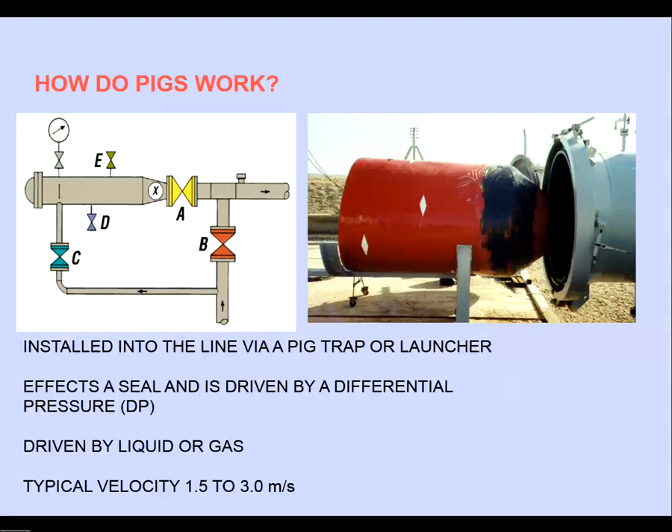So as I mentioned before, they're driven by the pigging medium, so whatever's in the pipeline, be it a gas or a liquid. Liquids are much more preferred. Obviously the pressures on a fluid pipeline tend to be a lot lower than gas, which is generally quite high pressure. So typically liquid lines, in particular oil lines in the North Sea, will operate maybe around about 30 to 40 bar. Gas pipelines could be 120 bar plus, so the pressures are considerably higher.

That creates some problems when pigging with gas, simply because the compressibility of the gas is such that the pigs will be subject to a series of velocity excursions. So when they come to a bend, they'll slow down, the gas pressure builds up, and they'll fire off quite quickly. It's very difficult to control pig speeds in a gaseous product. It's much more easier in a liquid.

A liquid is also a fluid environment, so there's lubrication in there, there's less wear and tear on the pigs, and the pigs generally perform better. Gas pipelines, although you do get wet gas and there will be condensates and moisture in there, tend to be a very dry, very aggressive, very harsh environment.

And the components on the pigs that provide the seals are a polyurethane material, so it's an elastomer material. It does have good wear and tear properties, but it will wear out over time, a little bit like your tyres, your rubbers on a car.

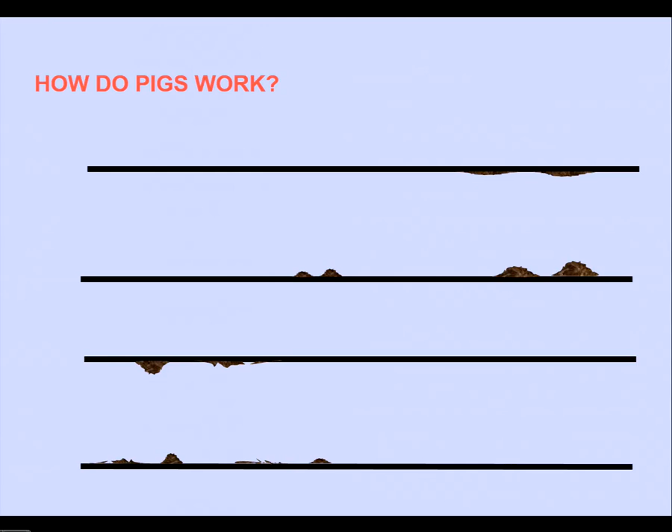A note to consider for later on from a cleaning point of view in particular is, if we allow the pipeline product to bypass through the pig body, this will create a forward flushing action. So we have the gas or the fluid coming in between the disc packages. It circulates around the brushes, which will help with cleaning the brushes and maintaining them and keeping them nice and clean.

But by allowing the product to flow in front of the pig, there's one of two things. It will create a turbulent flow at the front of the pig, which will prevent solid debris and mass building up, but it will also allow us to control or reduce the speed of the pig a little bit, in particular in gas lines. So with the high pressure, high flow gas lines, bypass is normally used to reduce the rate of the pig speed in relation to the gas speed. So obviously with a hole through the pig body, the pig will run slower in the gas than the gas is running itself.

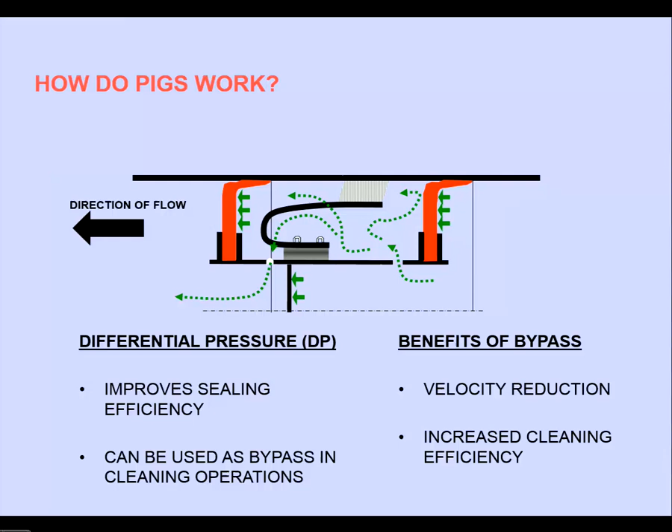A little example of the bypass. If bypass isn't used, the pig will go along the pipeline and debris will build up in front of it. If it's a waxy line, crude oil for example, that has the potential to build up and form quite a large slug, often referred to as a wax candle, and it will reach a point where the friction required to push that candle along the pipeline is greater than the differential pressure available on the pig, so it becomes stuck and you effectively block the pipeline. The same can happen with other solid materials, dust, debris, scale and powders in gas pipelines.

So if we use the product, the gas or the fluids, to assist with the cleaning, it helps to eliminate blocking the pipeline, and it helps to clean the pipeline, because that gas flow or fluid flow creates turbulence in front of the pig, which keeps the debris suspended and moving, mitigating the risk of blocking the pipeline. The worst thing that can happen when you put a pig in the pipeline is you block it.

Once the pipeline's blocked, it's effectively plugged and production stops. There are lots of different techniques that can be applied to remove that pig, but if you can't get it out, ultimately it's got to be located and you've got to cut the pipeline section out. So it can be a very expensive operation - a very expensive mistake to make, getting a pig stuck in a pipeline.

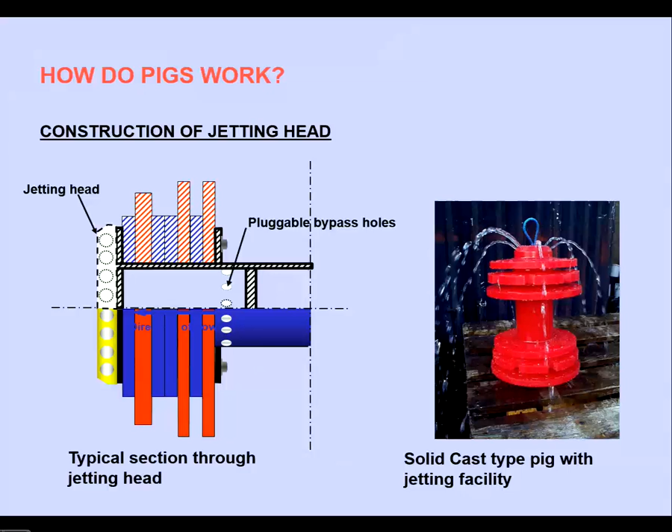So pigs fall into three main categories. I don't know if you've already covered intelligent pigging? I'm not quite sure why the introduction to pigging is always done after intelligent pigging, because it makes sense to introduce pigging and the practice of pigging before you talk about the inspection tool, since pipeline cleaning and preparation always comes before the inspection operation. I don't know why they insist on putting me behind it. But anyway, intelligent pigs - fine, we've talked about that. We're going to focus really on utility pigs and specialised pigs.

So utility pigs are often called production pigs or fit-for-purpose pigs. These are already available off the shelf - there are a lot of different pig manufacturers in the UK and in Europe generally, with different designs and different features, but they all follow the same principles, and the standard pigs are all readily available and will suit most operational applications.

But when it comes to pipeline preparation for inspection or other activities, or if you've got a particularly bad issue with the pipeline, such as heavy wax build-up, then you need to use more specialised pigs, and you may also need to add some intelligence to those pigs. Sometimes they're called semi-intelligent pigs, and there is a bit of crossover with intelligent pigs, but ILI, intelligent pigs, always refers to a metal loss inspection type tool. When you talk about a semi-intelligent pig, we're talking about a standard pig or a special pig that's got some additional data technology bolted onto it. We'll talk about some of these technologies a little bit later on.

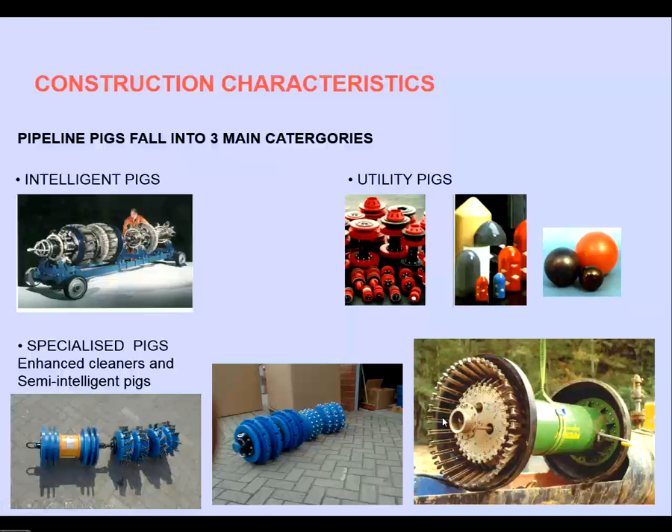So examples of specialised pigs: there are dewaxing tools, designed to remove wax specifically. This one's designed to remove harder scales. And this is a geometry tool - we'll talk about a geometry or caliper tool a little bit later on.

From a construction point of view, there are polyurethane pigs, but generally most pigs are metal bodied. They're single bolt or fabricated. Single bolt is, as the name suggests, smaller diameters - it's just a single bolt assembly with discs on either end and a fixing or fastening at either end. Most operators tend not to use single bolt pigs these days, simply because they don't have the same strength as a body tube - it's a solid bar, so it doesn't have the same strength.

Tubes are preferred - what we call the multi-bolt design. So you have a body tube with flanges, the polyurethane seals slide over the body ends, and they're fixed on with a series of nuts and bolts. Another common terminology is unidirectional or bidirectional. Unidirectional, as the name suggests, means it will only travel in one direction, and bidirectional means it can travel in both.

The difference between the two is the type of sealing element that's used on the pig. With a unidirectional we have a cup, with a bidirectional we have a disc. With a cup, because it's an umbrella profile, it can only be driven in one direction - it will only seal in the forward direction. If you pressurise it on this side, the pressure will just blow over the back of the cups.

A disc is a solid sheet of polyurethane that will seal pressure on both sides, so it will be driven in the normal direction. The great thing about a bi-di pig is if it does become stuck for any reason and you need to reverse pig it, you can, by depressurising downstream and pressurising upstream, push it back the way it came. You can't do that with a unidirectional pig.

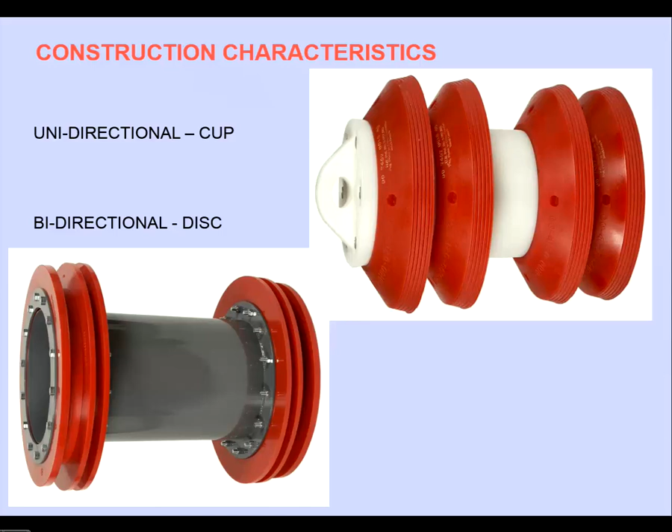From an operations point of view, cup pigs or unidirectional pigs are really only used as part of a cleaning program where you want something low performance. More and more, most operators and service companies use the bidirectional disc pig because it can be reverse pigged if it becomes stuck, but also even in standard form it performs a lot better - it's a better cleaner because it's a disc action rather than a cup, and I'll demonstrate that. So they're preferred for most operations.

So the conical cup was the one that I showed you there - it's a long flexible section. It only seals pressure in one direction, but the big advantage with the conical cup is because it's a long profile and very flexible, it will negotiate reductions in the pipe bore of up to 25%, which is good from a cleaning point of view, especially if we've got concerns about a lot of debris in a pipeline, and we'll touch on that later on.

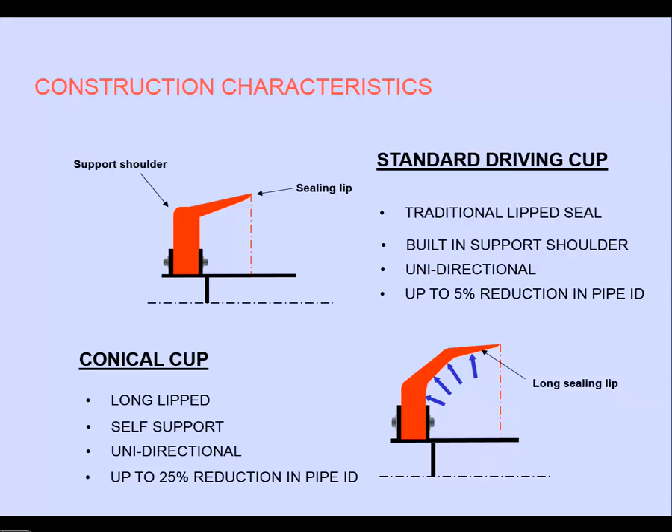The disc design by comparison is much preferred. We have a support disc or guide disc at the front, which is normally slightly undersized in relation to the nominal bore of the pipe, providing support at the front and rear. Then we have a couple of thinner but more oversized sealing discs which are designed to be oversized and a tight fit in the pipe.

A bi-di pig as standard will normally negotiate a reduction in bore of around 5 to 8% without any modification. But the big advantage is improved performance compared to any cup pig, and the fact that it can be reverse pigged - it's bi-directional.

There is a difference in cleaning performance between a cup and a disc. Obviously a cup, because it's a conical section, is very flexible, and when you get debris building up in the pipeline it will tend to ride over the top of it, so it can be deflected quite easily. Sometimes that's a good thing if it's part of a specialised cleaning program, because you don't want to bring out very much debris.

But as an operational pig, running it on a regular basis, it's not ideal because it will leave wax or powder in a pipeline. A disc, by comparison, because you've got this solid, thick diameter disc, effectively bulldozes and pushes debris out, so it's a lot more aggressive, as this sketch demonstrates - there's no lift off. It's very good at bulldozing and pushing, but the risk with a bi-di pig is if there's a lot of debris in a pipeline, potentially it's much easier to block it and get it stuck.

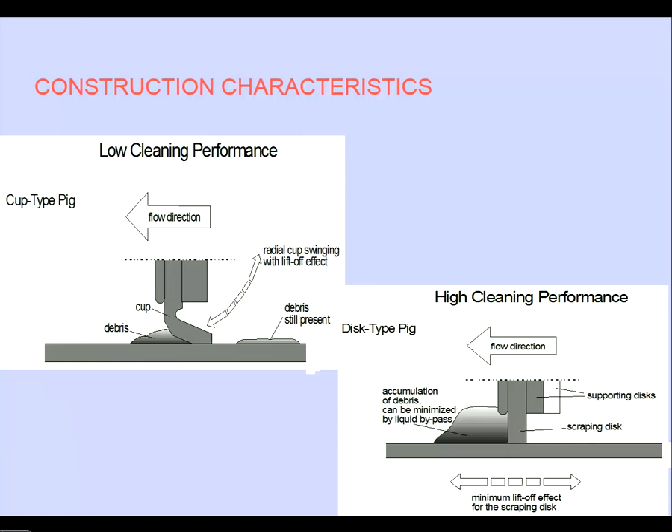With the metal bodied pigs, some of these slides demonstrate the different types of pigs available and their different construction characteristics off the shelf - single bodied or multi-bolt, unidirectional or bidirectional. I mentioned standard designs for specific applications: brush pigs, gauging pigs, batching pigs, dewatering pigs, a whole range, all of which we'll touch on. These are available from a multitude of manufacturers - I think in the UK there are 4 pig manufacturing companies, all competing for the same business.

They're all available in ranges from 1 inch upwards, 60 inch and bigger where necessary, and they all have very similar design characteristics. Most pigs available off the shelf nowadays are designed to go around a minimum bend radius of 1.5D. It's not such a problem in pipelines constructed in the last 15-20 years, because the minimum bend tends to be 3D, which is good from a pigging point of view.

A lot of older pipelines going back to the 60s used short radius bends, which can cause problems from a pigging point of view with negotiation, and they do cause problems for the inspection tools. But most off-the-shelf pigs will accommodate that.

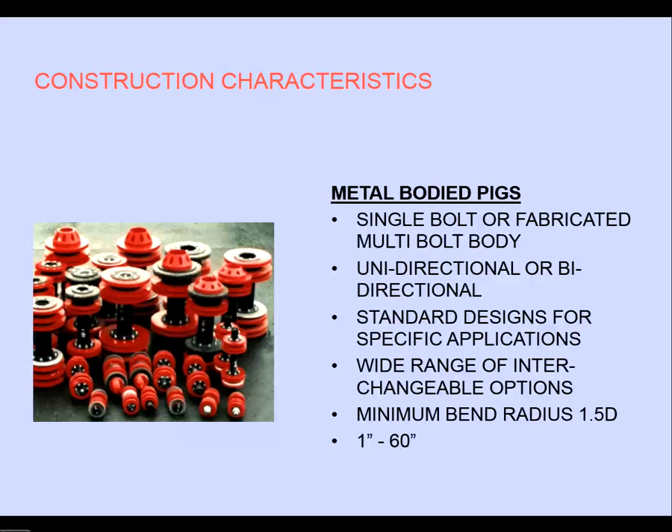A 16-inch batching pig will be £400 or £500, and the replacement discs will be maybe £250. So we're not talking about very expensive items. Some of the other pigs we look at are much more expensive by comparison, but these are quite cheap, fit for purpose. The urethane ones, of course, once they've worn down, are effectively scrap, they're no good. You can't refurbish them, they just go in the bin to be disposed of. And you can't put brushes on, or add other appendages to them either.

Foam pigs - these are the lowest performing pig of all. From an operational point of view, they're very rarely used, more used as part of a cleaning program for a specific application. The big advantage with a foam pig is it's very, very compressible. A disadvantage is it's very weak, so it can easily tear or break up, but that's also a good thing.

To improve performance, the bare polyurethane foam is often coated with a polyurethane skin, just to give it a bit more stiffness, a bit more rigidity. It still maintains the same degree of compressibility, and it just means it will last a little bit longer. But again, these are really only a one-run pig, so once it's been run once and it's worn down, it usually goes in the scrap bin.

From a cleaning point of view, you can have them manufactured with what's called wire card - a wire cast on a cloth and cast into the foam to make it a bit more aggressive, like a file card. Or you can get them grit coated, so they're abrasive when they go down a pipeline. Often used for pre-commissioning and commissioning phases, and often used as proving tools.

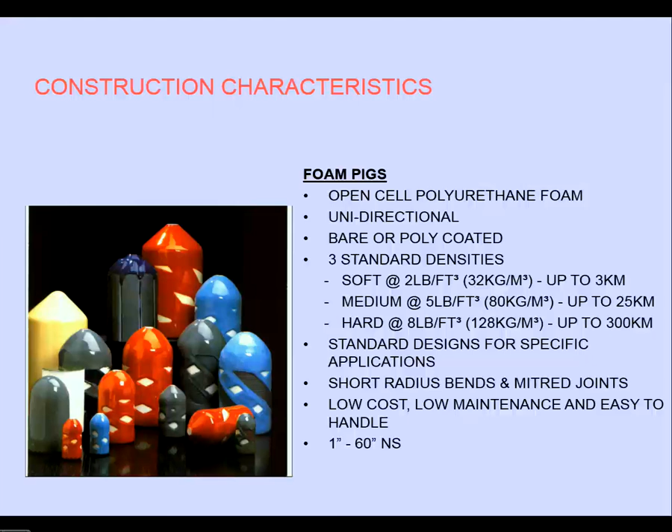A big consideration with foam pigs, particularly on receipt and along the pipeline, is that because the foam is very soft, it will quite easily divert up a branch. So if you've got a branch or an offtake along a pipeline length, unless it's barred, which we'll talk about later on, foam will very easily go up it. When you're receiving pigs, a metal body pig comes into the receiver, it's an oversized barrel, it will stall very quickly, but a foam pig will come in at usually a little bit higher speed, and there's a risk it can go up the bypass line. So with foam pigs you need to put in what we call a receiving cassette to catch it on receipt, which you don't normally need with metal-bodied pigs on receipt.

Pipeline spheres are rarely used. They used to be quite common in gas lines for condensate removal, liquid removal in gas lines. Mainly these days they're used for meter proving, so onshore just for calibrating gas meter proving systems. It's basically a hollow polyurethane ball which is filled with a fluid, normally a water and glycol mix, and it's inflated, so it's slightly pressurized, and it's a tight fit in the pipeline. An advantage with them, from a condensate removal point of view in gas lines, is that as they wear down, you can increase the diameter by inflating them again, a bit like a tyre, but they'll reach a point where they'll literally start to split. But again, not used very often these days—you probably won't see them.

So those are the main construction characteristics: metal-bodied, solid cast, foam, and the spheres.

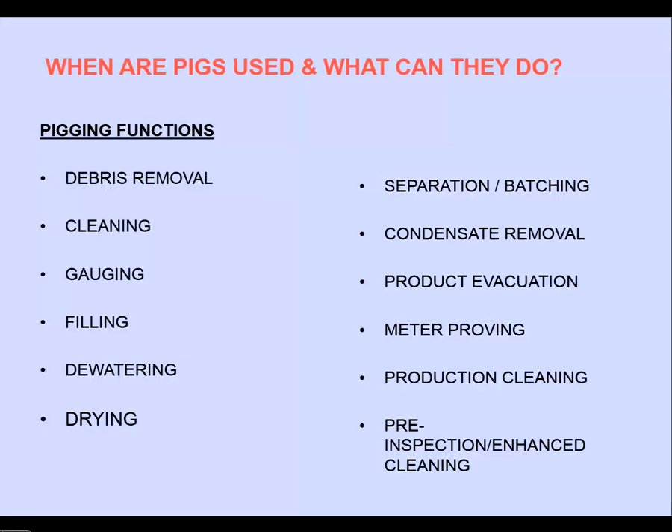Where are they normally used? They're really used right across the pipeline's normal life, from construction right through to decommissioning. Lots of different functions, and the functionality is managed by the pig design: the disc type, the cup type, putting brushes on there, putting other cleaning materials on, putting aluminium gauging plates on, which again we'll talk about. So the functions are very varied, and you can select the function for the task in hand, whether it's cleaning, filling, dewatering, drying, etc.

Okay, so when it comes to debris removal, quite often we'll use batching bi-di pigs.

Could you repeat again, spheres please? What's the role of spheres?

Spheres aren't used very often these days. They were commonly used for gas pipelines for condensate removal, but now most operators use bi-di pigs, to be honest. If you go back sort of 25, 30 years ago, spheres were common in what was called an automated system. You'd have a launcher which was inclined, and you'd maybe put 5 spheres in, with a control finger, so they could be launched automatically—they would just roll into the pipe, open the valve, roll down, and get caught up in the flow. But they don't do a very good job at anything else. They're only really used for condensate removal in gas lines.

Meter proving is where they're commonly used today. So if you've got an onshore gas receiving station with provers measuring the gas flow that comes in, they'll still use spheres because it's a known diameter. You've got a known pipeline volume over a distance and a known pipeline bore. It's just used to meter the gas as it's coming in and calibrate the gas flow meters.

Debris removal and cleaning, lots of different types of pigs which we'll talk about. This is a bi-di pig, so you can see you've got the support disc at the front and at the back, and then you've got the two sealing elements here.

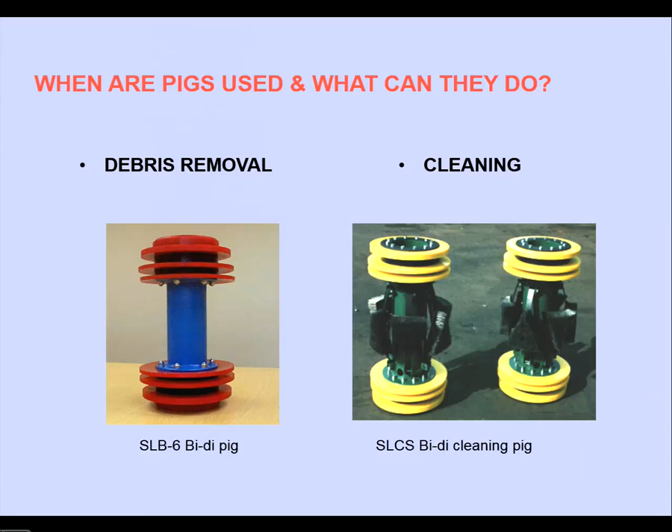Again, different types. This is an older design. It's a cup, a lip type cup arrangement, and you've got what's called a flat spring brush - a brush on a spring arm. These are a little bit dated. Some operators still use them, but because the brush is mounted on a single spring arm, it will tend to bounce and ride over debris.

A better option is a circular brush. Can I ask a question, please?

During the brushing, might it affect the internal surface of the pipeline? I mean, negative effect on the internal surface. No, there's none, because the metals that we're using are comparable.

They tend to be a small wire gauge, usually mild steel or stainless steel. This is a pretty poor pig design, because these bristles are a flat section, like 3 millimeters by 0.25 millimeter bar, folded a bit like a hair grip. So as soon as that goes in the pipeline, it's got no memory, it deflects, it deforms, and it'll stay deformed, so it'll tend to just rub or scrape along the pipeline rather than brush, unlike a bristle.

Brush pigs of this type will clean a pipeline back to bare metal, but they won't cause any damage at all. There is a consideration though, with flexible risers and the stainless steel carcass - if these brushes were particularly aggressive, because the inner carcass is like a corrugated assembly with ringed steps in it, they can potentially cause damage if they're too aggressive.

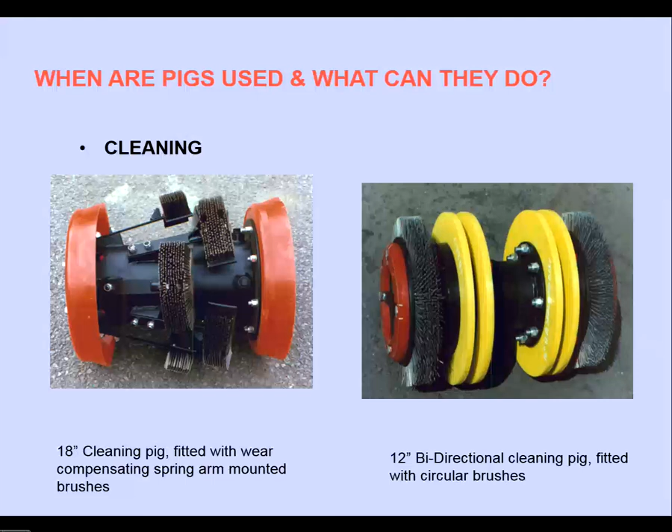The pig on the right is a much better cleaning tool by comparison, because the brushes are fixed - there's no bounce. But if the wires are round, you can select the wire gauge to make the brush either softer, like a house sweeping brush, or stiffer, like a yard brush. So you can control the aggressiveness of the brushes with round wire quite easily on the circular brush types.

Magnetic cleaning. The brushes are great for cleaning debris, sweeping it out and brushing it off the pipe wall. If you've got ferrous debris in there, we often use magnetic cleaning pigs to pick up that metallic debris, and that can be bristles.

These are like bristles that have come off cleaning pigs or inspection tools. You've got some construction debris in there, bolts. That's a great picture, but I'm pretty sure somebody's just thrown that on there to make it look good. In reality, a piece of metal that size with that type of pig would get pushed out in front of it - it wouldn't normally ride over it.

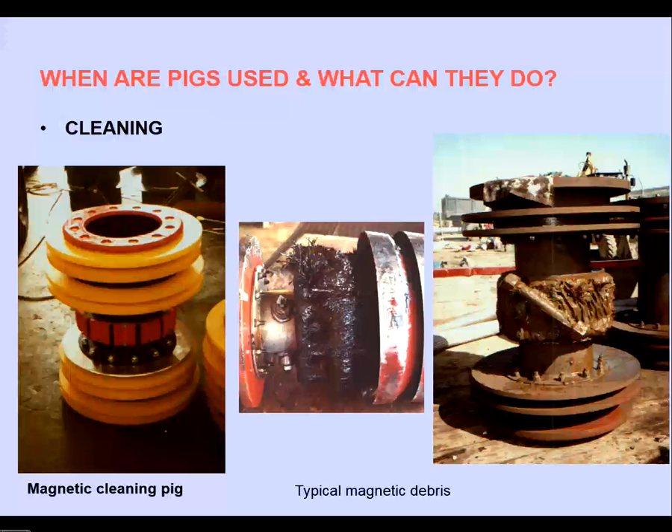At the time of launching these magnetic pigs, are there any precautions at the launchers? No. Did you talk about MFL inspection tools? Our MFL inspection tools have got big, high power, real high strength magnets. These, by comparison, are much lower grade - typically just a hard ferrite magnet or sintered neodymium iron boron. Nothing exotic, relatively small, relatively low strength.

Some pig manufacturers will advise there's a warning on magnets. So if you've got a pacemaker fitted, for example, you'd need to be careful. But they're not very, very high strength, not like the inspection tools.

On some of the higher performance magnetic cleaning pigs, they'll sometimes put a metal plate just to limit the magnetic field strength, which has to be removed before you put it in the pipeline. But apart from the weight of the thing, and being aware it could have an impact on anybody fitted with a pacemaker, that's the only real concern.

Your procedures as an operator should cover that. The pig manufacturer should also advise accordingly, but it should be caught and captured in procedures. It could also affect your watches and credit cards, I suppose, if you're too close to them. But honestly, the strength of the magnets on standard pigs isn't really high enough to cause any real risk.

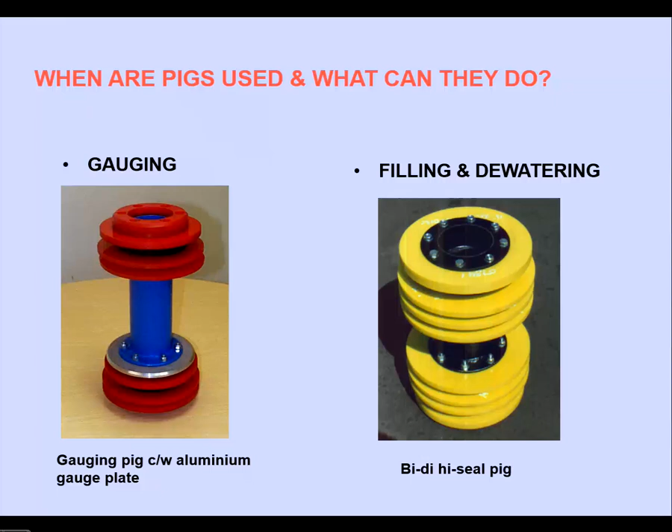Drying. Foam pigs can be used for drying purposes. After a pipeline is constructed, it'll be hydro tested, so it's filled with water normally and hydro tested. That water then has got to be removed.

You'll use a number of the filling and dewatering pigs, pig on the right, to bulk remove the liquid. Then you need to get the residual water, residual moisture out there, because quite often an operator will want a line to be of a certain dryness or a certain dew point. So foam pigs will often be used just to simply swab, blown through with air quite often, sometimes nitrogen, but mainly with air prior to doing a vacuum dry or a hot air dry, just to mop up any residual water.

Separation and batching. So spheres we mentioned earlier on for meter proving. It's worth pointing out they can be used often in the food industry and in multi-product pipelines for separation and batching of dissimilar fluids that are used in the same pipeline. So if you go to a processing or a food factory, you might have a pipeline that's doing tomato sauce one week and HP brown sauce the next week. It's the same pipeline, you just put a pig in to provide a barrier between the two dissimilar products and also evacuate it out.

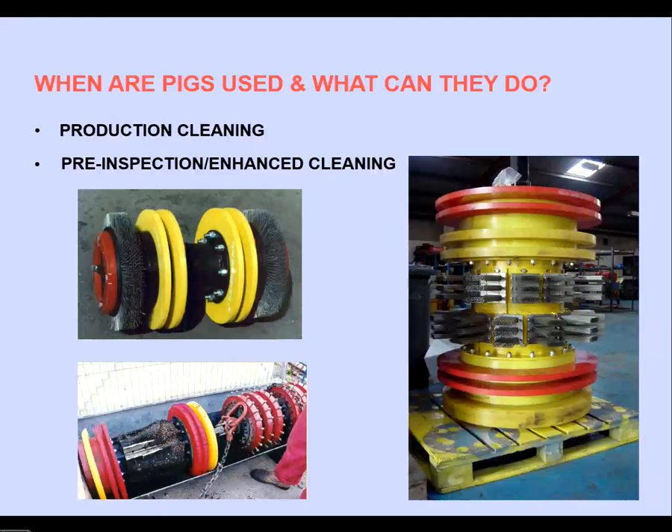Okay, so that's pigs, the constructions, various types and where they're used. Just carry on.

For separation and batching pigs, how would you receive the pig, and is there any issue with the product coming behind the pig? It'll depend on the particular process setup. They'll have various valve stations that divert flow down particular branch lines by valve control. When we talk about dissimilar fluids like that, it tends to be quite small bore pipelines, anywhere from 1 inch up to maybe 10 inch, so relatively small pipes. There'll just be valve manifolds which control and divert the flow before the pig's received.

Okay, so considerations for pigging. When you're selecting a pig to do a job, there's a certain job you want it to do, but we've kind of touched on a few of these points already. There's certain things you need to consider. Obviously, you need a launch and receive trap. If you haven't got those, you need to look at making modifications, because you need access to the pipeline, you need to be able to put the pig in and recover it, and you need to be able to do that safely.

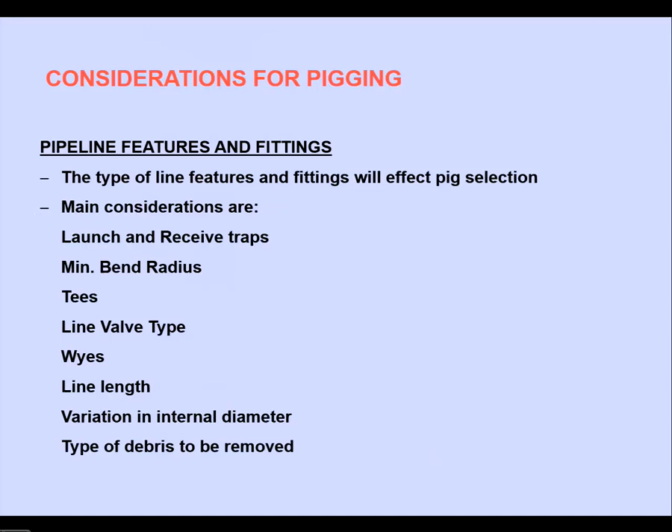The length of the line, so the material selection could vary, and the pig design could vary a lot between a pig that's going to be used in a pipeline that's 10 kilometres long compared to one that's 600 kilometres long. Variation in the internal diameter, and of course the type of debris that we're trying to remove.

So the bends - we talked about the difference in bends. Most pipelines today are 3D and above, so it's less of an issue, but historically, if you've got short radius bends, there is a risk if you don't select the right pig, or the pig's too long by design. When it comes to the bend, it will stop, it will stall, it will get stuck.

So how are you going to get it out? First of all, you've got to find it, and then it depends on how it's stuck. If it's not bi-directional, you can't reverse pig it. There's lots of different things that you try, so increasing the pipeline pressure to try and force it through, cyclic loading. If all else fails, you've got to locate it and cut the pipeline - shut it down, cut it, remove it, put a new fitting in.

We once actually - just on that note, I worked for PII quite a few years ago on the pre-inspection cleaning side of the business, and we were in, I think it was Nigeria, I can't remember, it might have been Nigeria, I can't remember.

But we were pigging the pipeline, foam pig had gone through it, no problem. We went through the development stages and we put a metal bodied pig in it and we were tracking it, and it got stuck. We found it, we located it because it had a tracking device on it, a transmitter which you can follow above ground. So we found it, we were looking at the pipeline P&IDs, and the operator said it's a bend, a 5D bend, it's not a problem, the pig can't be stuck here.

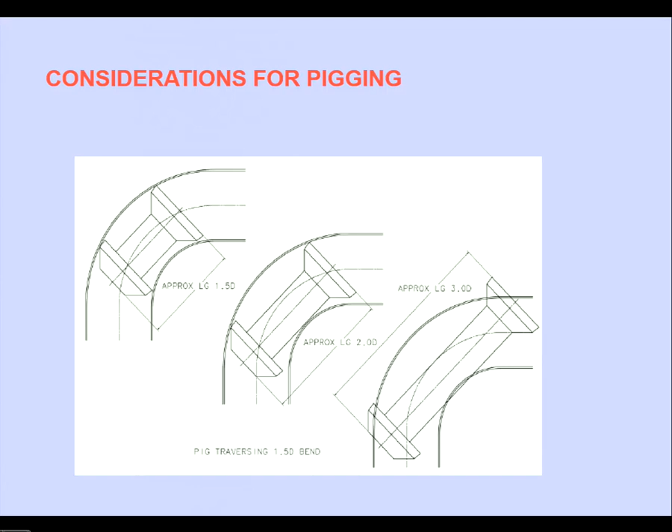And in that case, who needs to pay for the consequences? The pipeline operator, the owner, because the information that was provided was incorrect. So the pigs, the cleaning program and the inspection program was correct in line with the data that was presented, but because the bend wasn't a bend, it wasn't our fault. But usually the inspection contractor or the pigging contractor, it's always their fault as far as the operator is concerned, until they can prove anything different.

And with the inspection companies, there's often issues with inspection. So when you're doing a pipeline inspection, MFL or UT, it's got to be clean. It's got to be much more cleaner for ultrasonic inspection than MFL.

Quite often, inspection companies, when I worked for PII, used to do their own cleaning, which was fine - they were responsible for the cleaning. Then they moved away from doing their own cleaning to using subcontractors. So if you have a subcontractor for the cleaning and one for the inspection, if the inspection fails, the first thing the inspection company says is it's failed because the line is too dirty. And the cleaning contractor says, no, we cleaned it and there's no dirt coming out. So then you get into a battle between the two companies of who's responsible - the inspection's failed because the line's dirty, but he's saying it's clean, he's saying it's not.

So, who covers the cost there? But today there's technologies that can prove a line is clean before you do the inspection.

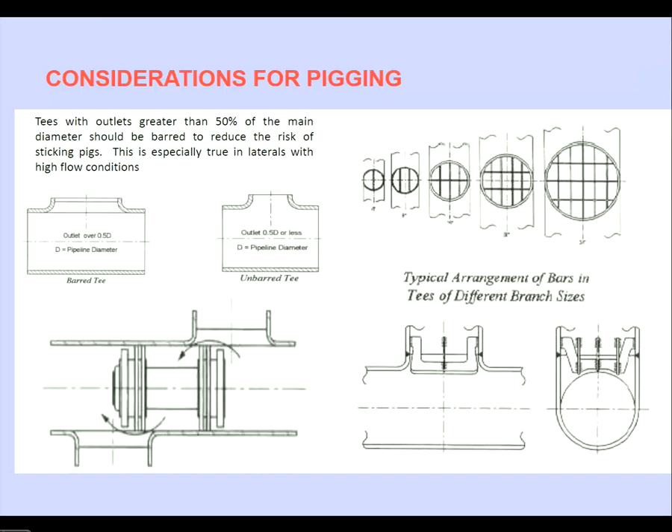So valves, there's a few valve types. You don't really see these on pipelines, to be honest. Most valves are full bore valves these days. Quite often you'll get reduced bore valves, but pig design is such that they'll easily negotiate reduced bores to your valves, as long as the transition is tapered and not stepped. That goes for any pipeline change in diameter. If you've got a change in diameter from pipeline or fitting from one to the other, it doesn't matter if it's 5 or 10%, as long as it's ground or machined into a concentric taper rather than being a stepped change in diameter. So just a few common sense points really on the valve side of things. But you won't see anything other than a ball valve in place these days.

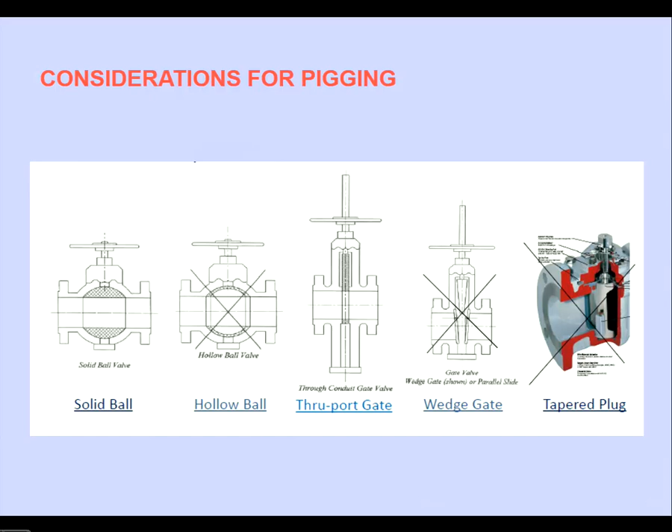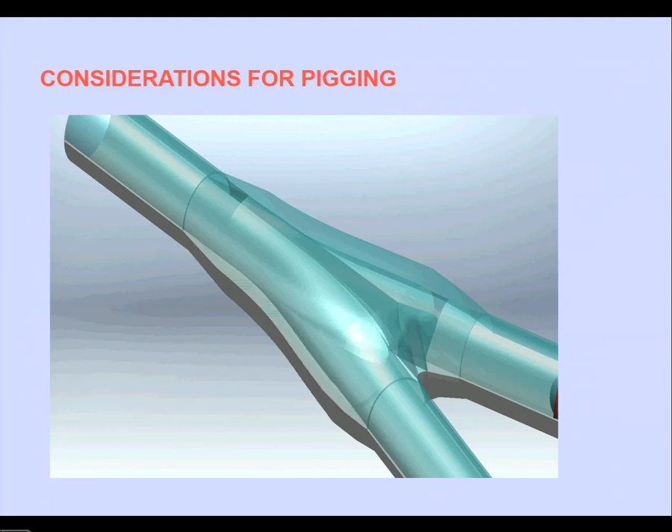So wye pieces I mentioned earlier on. These are wye pieces where you've got two pipelines coming together. There's a number of wyes in the North Sea. They can be pigged, but they can only be pigged in one direction, and because of the length of this open area here, you've got quite a large area which is open, so it's difficult to seal across the wye piece, so you need a much longer pig. If you make the pig longer, then the risk is it's going to get stuck in the bends. So to accommodate that, they're quite often articulated. It's made up of two modules, and then you've got an articulated joint. So it's got the sealing then, sealing the wye piece, but when it comes to a bend, it's articulated, so it'll just bend. Just got a knuckle joint in the middle.

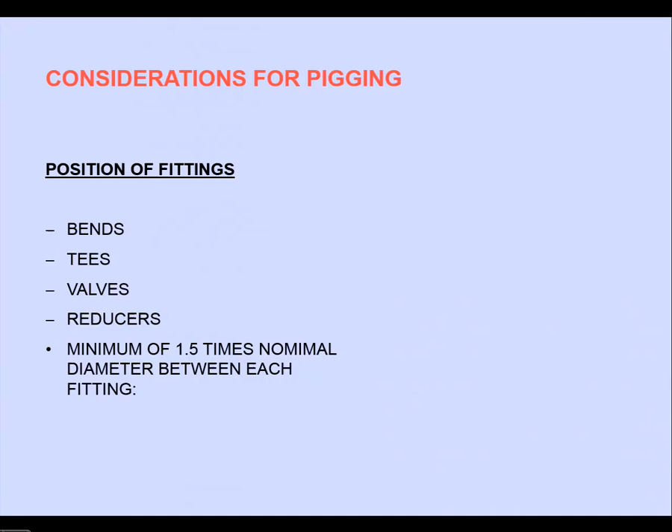The positions of fittings from that T drawing - back-to-back bends or bends that are very close together, even if the tool is designed to go through that particular bend, can sometimes cause problems. So normally the recommendation would be there's a minimum of 1.5 times nominal diameter between pipeline fittings. If you've got two bends simply welded back to back, then that can create a problem from a pigging point of view. Even with current modern up-to-date designs, it causes big problems. Some people might refer to S-bends, where you've got two bends back to back. There should always be a short section or a pup piece in between.

Multi-diameter pipeline - pigs will accommodate a change in diameter, generally sort of 5 to 8%, no problem, with very little modification. But you do obviously get multi-diameter pipelines now, so you might have a 12-inch line that ties into a 14-inch line or a 16-inch line, and it's a continuous pipeline, so you might have multiple diameters rather than multiple bore changes. Most pipelines can be managed - 16 by 24, 12 by 14, so there are some big step changes out there. The pigs that are used for the larger diameter changes are very specialised, obviously, and they need to be designed specifically for that particular job.

Excuse me, how much money would it cost to rent a pigging company?

To rent a pigging company, you just invite them. If one wants a pig, they normally charge a day rate - approximately between £500 and £900 per man per day, so around £1,500 per day plus the mob and demob costs, and then the rental.

Is it profitable to open a pigging company? Oh yeah, there's lots of pigging companies. Halliburton is probably one of the world's biggest. They do a lot of pipeline pigging, commissioning works, and they also do operation work.

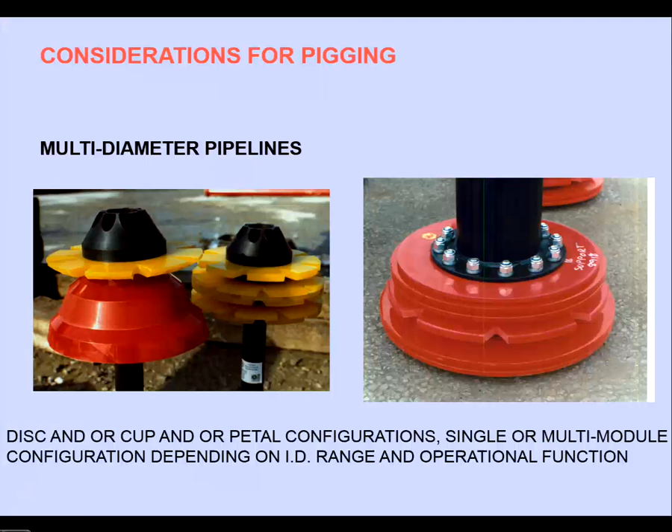The length of a pipeline is a consideration as well. Most standard pigs are good for up to sort of 150 kilometres, but as lines get longer, you need to think about high performance urethane - material that's going to wear longer and be a bit harder - and things like suspension wheels, the addition of wheels to reduce the bearing load and allow the pig to run further.

This particular pig here was designed for the Yacheng pipeline, which I think might have been a 36-inch pipeline, but it was almost 700 kilometres long. So that pig ran 700 kilometres in a gas line and came out in one piece, and that's the pig that they run on a regular basis.

The other consideration, of course, is the type of debris that you're trying to remove. If you're trying to get out ferrous debris, metallic weld rods, etc., you need a magnetic cleaner. A brush pig will sweep it out, but a magnetic cleaner will pick it up better. Brushes are good for dust, soft wax, any sort of loose debris, powder, particulate, loose scale.

For harder waxes, we need to use more aggressive brush type cleaning pigs with discs, or more aggressive specialised cleaning pigs. Hard wax, hard scale is difficult to get off the pipelines, and none of the pigs I've shown you are really any good for hard wax or hard scale problems. Descaling pigs are the type of pig which can damage a pipeline - you'll see how aggressive they are in some of the slides.

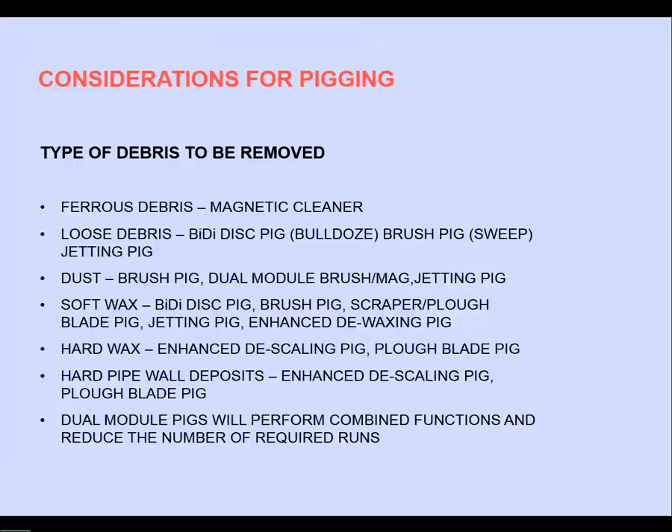Yeah. Okay. Crack on. So yeah, we'll cover that in a little bit more detail as we go along. But obviously, when you're selecting your pig, you need to be aware of what it is you want it to do. Do you want it to remove soft debris? Do you want it to remove wax, hard wax or soft wax, scale, loose scale, powder? Do you want it to just bring out water? So there's lots of things, and every pipeline's different, so it varies and it can vary from field to field.

So yeah, all pipelines are different. We need to consider them individually. We need to look at the pipeline features, so the bends, the valves, anything that might prevent or inhibit the running of a pig through the pipeline, the pigability as we call it. What it is we want the pigs to do. Standard pigs off the shelf, so the utility pigs might not be suitable. You might have to look at more specialised pigs, more aggressive pigs, more specialised materials.

Something that's not mentioned on there, high temperature is another consideration, of course, with the urethanes. So standard urethane is good for maybe 60 or 70 degrees, but if you've got a pipeline that operates at high temperature, you might need to consider alternative materials to polyurethane, like rubbers. And you also need to consider the volume and the type of debris you're going to remove. So again, before we start pigging a pipeline, if it's a pipeline that hasn't been pigged for a long time, there's a proving process, but it might well be worth doing a flow model on that before you start thinking about pigging.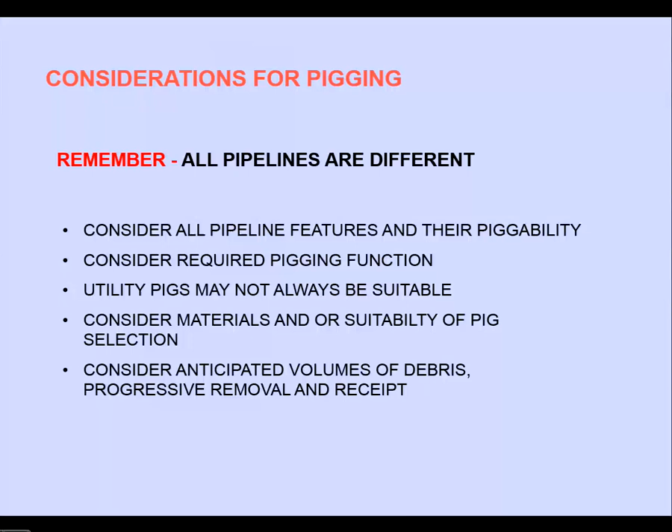So why clean a pipeline?

It's very much like our own system of veins and arteries. If you go large at McDonald's five nights a week, cholesterol's going to build up, fat's going to build up, those little arteries get smaller, and the old ticker finds it a lot harder. So over time it's going to pack in. It's the same with the pipeline.

You've got a pumping system ultimately, and a pipeline transferring that fluid or product. If the pipeline bore reduces, you need more effort to pump the same amount of fluids or gas down it. So ultimately it's a nice little analogy, but from an operator's point of view, it's a massive investment.

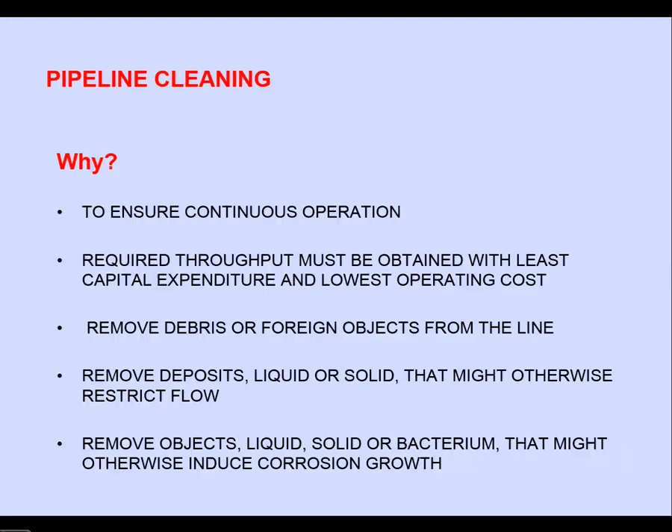So we want to keep it clean to ensure continuous operation. We want to maximise throughput, getting as much product through there, gas, oil, whatever it might be, at the lowest operating cost. We want to keep it clean because we don't want foreign objects in there, as that can cause corrosion growth. We want to get deposits and solids out that might restrict the flow, because that impacts production costs, and we also want to remove anything that might cause corrosion growth.

Here's some photographs of some pipelines. So that's scale build-up in a pipeline. You can see it has a big impact, and this is debris that's been removed as part of a cleaning program.

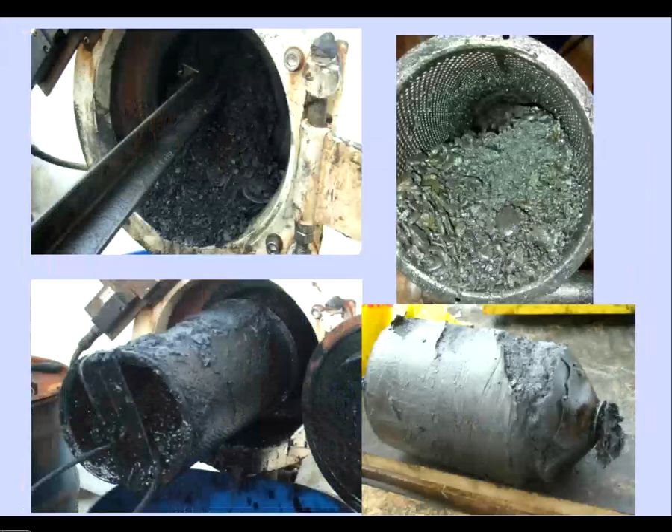So there's a pig pushing out soft wax, and it can be quite a nasty environment. This is scale being pushed out of a pipeline, so these are more hard pipe wall deposits.

That's a foam pig that's gone through a pipeline with a lot of scale in it, so you can see the foam pig's come out, but it's sustained quite a lot of damage. That tells you the pipeline's pretty rough inside, and that helps you decide how you're going to approach the cleaning and what type of pigs you might want to use.

So this type of debris is not uncommon, you come across it all the time, and some of these volumes can be difficult to manage. Environmentally, they can be difficult to handle. There's lots of considerations. And from an inspection point of view, you can see here, this is an inspection tool.

It's become so clogged up with wax that it's affected the sensors, so that inspection will have failed because of the amount of wax or the dirtiness of the pipeline.

As I said before, an inspection run might cost £100,000. If that's my inspection tool and it comes out like that, I'm going to say to you as the operator, sorry, we're not going to get any data because your line wasn't clean enough. It's cost you £100,000, I'll run it again, and that's another £100,000. So it's important to make sure it's clean.

And the same with this tool here, you can see this is a debris mapping type tool, so the wax is built up around the sensors. The wax build-up will impact on the quality of data that can be acquired, that's collected, and it could ultimately result in a failed inspection.

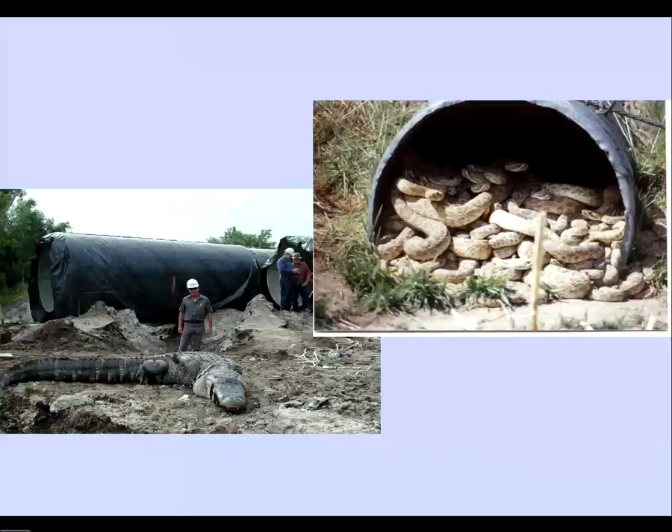So it needs to be managed. And then, yeah, this is construction obviously, but as part of construction, they've come back to the pipeline. It's full of snakes, and this one had an alligator, a big crocodile, down it.

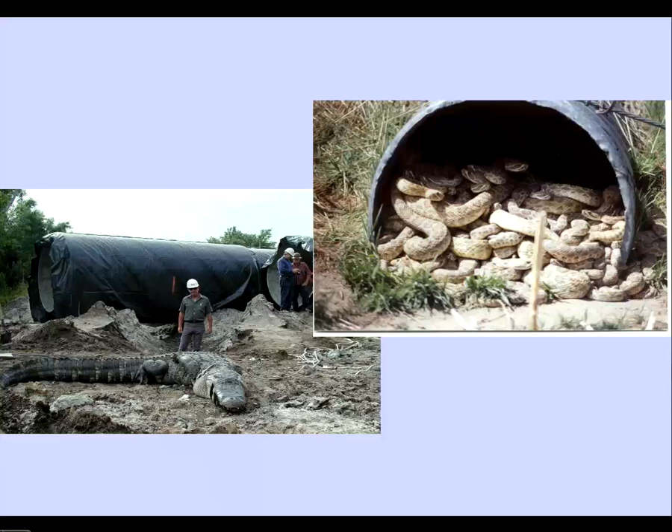The best story I heard from a commissioning point of view - the commissioning stage is when the pipeline's being constructed, it's all welded up, and it needs to be hydro tested before the product's brought on, before it's commissioned. So as part of the pre-commissioning phase, there was a pipeline in America, in the US, and apparently it brought out a donkey. This was T.D. Williamson. As part of the pre-commissioning, when they came to bring the first pig out, there was a dead donkey. The donkey had obviously gone into the pipeline whilst it was being constructed, walked down it during the night, and then the guys had come and welded it up.

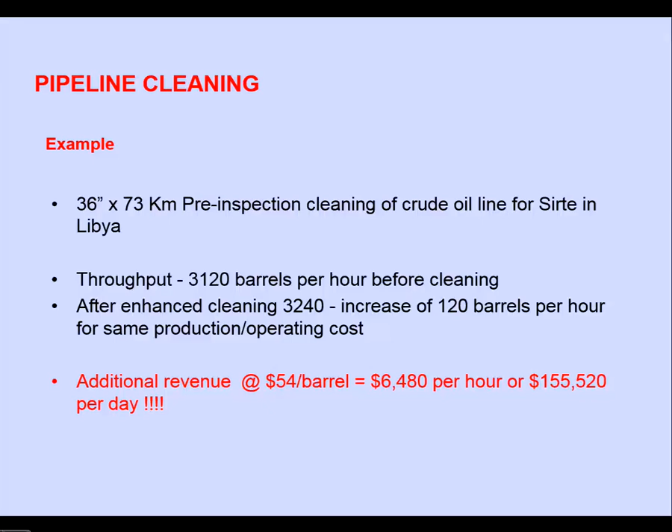So just an example of that - this is going back a few years, but it's a nice example. A 36-inch pipeline, it was in Libya for Sirte. The pipeline was to be inspected, but it had to be cleaned first. Normal throughput was 3,120 barrels. The pipeline was cleaned and inspected, and through doing nothing else, the throughput increased by 120 barrels per hour. Even at today's $50 odd a barrel, that's a lot of money for nothing. So a small investment from a cleaning point of view can make a big difference in the revenue generated from improved or increased throughput. And of course it means the operating costs are kept down too. So the benefits sort of speak for themselves really.

With regard to inspection and the cleaning and all the rest of it, we're looking at this. A pipeline needs to be cleaned from a corrosion point of view to ensure that inhibitors and biocides that are put in there hit the pipeline and clean and keep the pipeline in good condition, and get a good inspection. But from an operator's point of view, if I put my tracker hat on, ultimately we want to get as much product through that pipeline for the least operating cost, and by keeping the line clean, we can do that.

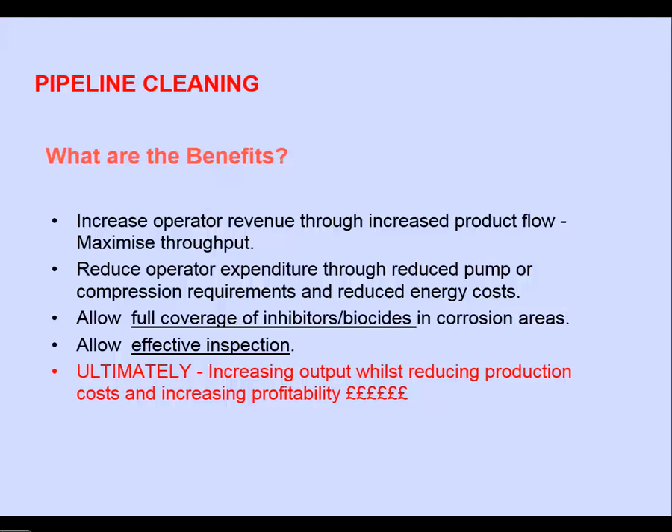We need to establish whether it is clean or not, whether there's a problem. We need to implement a cleaning program to get it to clean to the standard that we want it to get to, and we need to maintain that cleanliness, and we want to monitor it as well.

The more information we have on the background to its operation, the easier it is to determine how to clean it and what to do next. So if we don't have all of the pipeline details, the configuration, the P&IDs, then we need to start thinking about how we're going to prove the piggability and how we can acquire that sort of data.

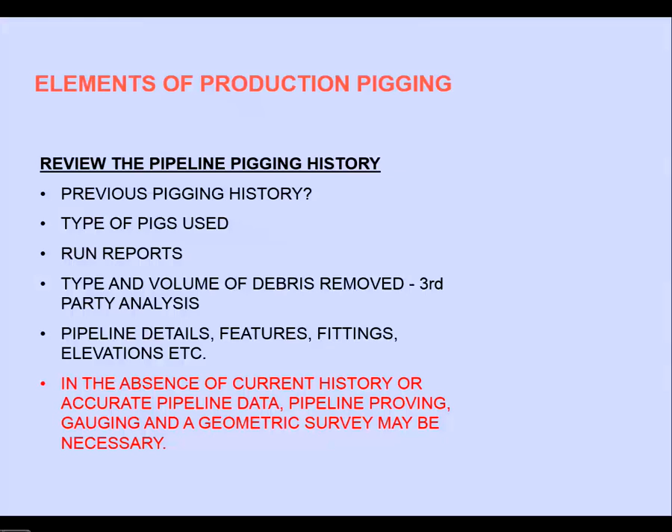There's a couple of common tools used to give us some of that confidence before we start selecting a cleaning program and looking at certain types of pigs. The base one is a geometry or caliper tool, sometimes referred to as a geometry survey. We'd first off need to prove the piggability of the pipeline.

So if we haven't got any of that background information, we'd go back to square one, we'd get a foam pig of a certain density, put it through the pipeline and see that it comes out. If it comes out in good condition, that's great. Then we'd probably put in a higher density foam pig. If it comes out in good condition, good. Then we'd use another high density foam pig and put an aluminium gauge plate on it.

So the gauge plate would be sized to suit the caliper tool. The gauge plate, if you remember, is used to confirm a minimum bore. So if we put a gauge plate of a certain size on a foam pig, and put it through a pipeline and it comes out in good condition, then we can be confident in putting a metal-bodied pig in if we know that it will negotiate the minimum bore that gauge plate has told us.

Caliper tools are very good at negotiating small bores, so depending on the manufacturer, they'll generally negotiate reductions in bore between 25 and 50%. So these tools, although they're a metal-bodied pig, can accommodate some big changes in pipeline diameter, and it's designed using, generally speaking, conical cups, because you don't want it to be effective at cleaning either, since at this stage we might not really know how much debris or what potential there is for wax or scale in that pipeline.

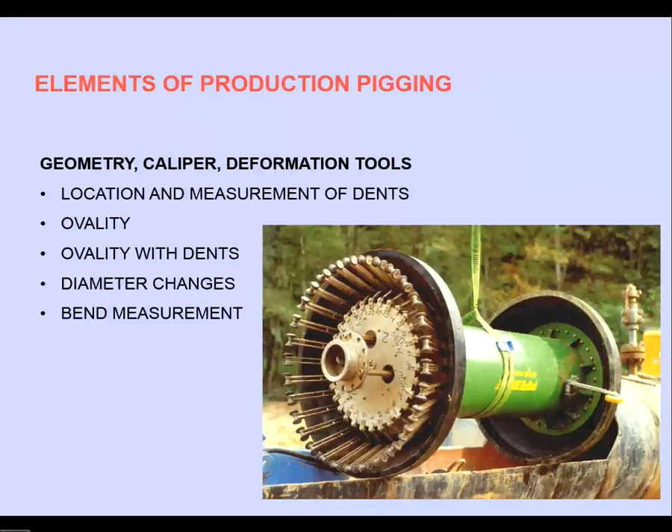So this is a fairly simplistic output from a fairly basic caliper type tool. It goes down the pipeline and gives us a pattern or a picture of what the pipeline condition is like. The middle one is actually the best, showing a fairly straight flat line with a series of peaks.

So these peaks that are uniform and a consistent distance can be identified as being the circumferential welds, the weld beads. So this caliper tool has seen all the weld beads, some minor anomalies. That tells us that generally the pipeline is in fairly good condition with regard to the diameter and the ovality.

When you've got dents, ovalities and various pipeline features, changes in diameter, where it goes through a valve manifold or valve station, there's characteristic signals which from a data analysis point of view can be read. Normally experts would obviously go through this information to confirm what there is. So that's typical of the sort of signals and characteristics you might see - change in diameter, dents.

This pipeline here on the bottom, this line is pretty erratic. You can see a couple of the welds, but it's all over the place. So that means there's a few things going on here. There's either a lot of severe anomalies and or pipeline debris, because the geometry tool measures variation in the bore. If you've got hard pipe wall deposits in there, hard waxes and scales, and even loose debris, it will read that as being a change in diameter.

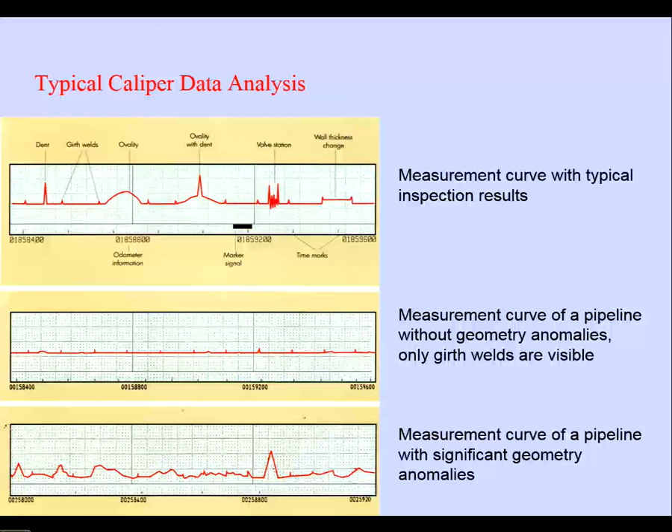This is a high resolution tool, so this is inspection data quality. We've got a pipe image, so it's almost photographic. And you can see from a cross-section point of view, it measures the extent of the dent, so you can see quite clearly there's a dent here. These are each caliper arm, it's moving the measurement on it. So the data that you get is really good, very accurate, high resolution, good coverage.

It depends what you want to pay for as well, because you pay more for a higher resolution than for a lower resolution. But it does give you a whole load of information. So that's a better example of the dent there.

So that's it from a FEA 3D modelling point of view, and then here you can see the extent of that dent. And then from here we can take the actual measurements, and that information you can take away and do 3D modelling, finite element analysis, and decide whether or not that dent is an integrity issue or not, and then you might decide that that dent needs to be cut out or whatever. But it's great technology.

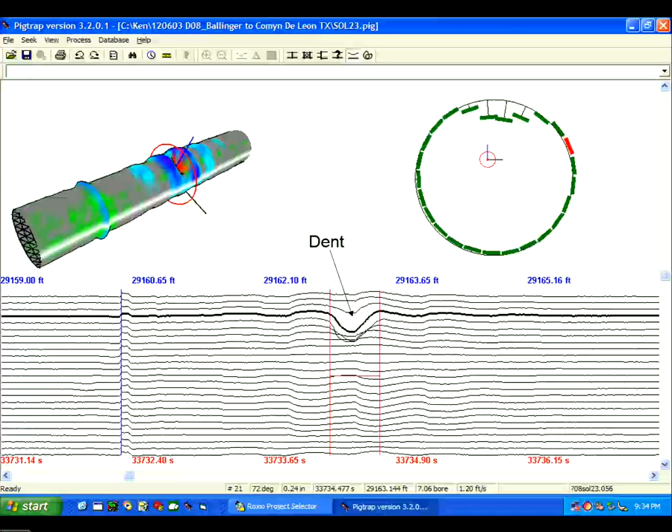So we need to establish the internal level of cleanliness. The geometry tool might give us an indication that the cleanliness is a problem, as that did. So we can look at the current pigging data, run reports to see what's been brought out, what we know about it, or we can do a deposition measurement. So there are a number of tools that are used to measure debris or map debris in the pipeline. Again, there's high level and there's low level.

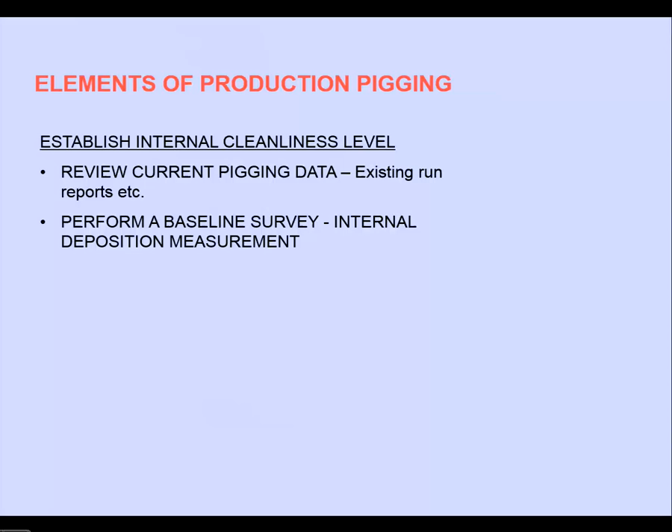So there's a very simple type of technology which is a data logger, and there's a more expensive high-end debris mapping tool. We'll talk about each type, but rather like the geometry run - if we've done a geometry run, then we can quite confidently put these tools into the pipeline straight away. If we're not going to do a geometry run, then we might need to do the piggability again using the foam pigs before we put these tools in.

Because all of these technologies, as you'll see later on, are optional. You don't have to run a caliper and a debris mapping. If you prove the pipeline and you know the geometry is not an issue, you could go straight for the debris mapping. You don't even need to run the debris mapping, you could just go straight into a cleaning program if you're happy with what you know about the pipeline. So all of these things are kind of optional, a little bit - not subjective, but you would only use them where they're required.

So the debris mapping tool, rather like the geometry tool, will locate and measure pipeline variation or bore, but in this case it's debris. There can often be two sets of sensors. One set is used to measure the pipeline geometry, and the other, which is much softer, measures lift-off.

So some debris mapping tools can differentiate between hard and soft deposits, some can't. And the great thing about these is if you've taken ownership of a pipeline, or you're going to inspect it and it hasn't been pigged since it was constructed, if you run a debris mapping tool before you start, you've got a baseline survey.

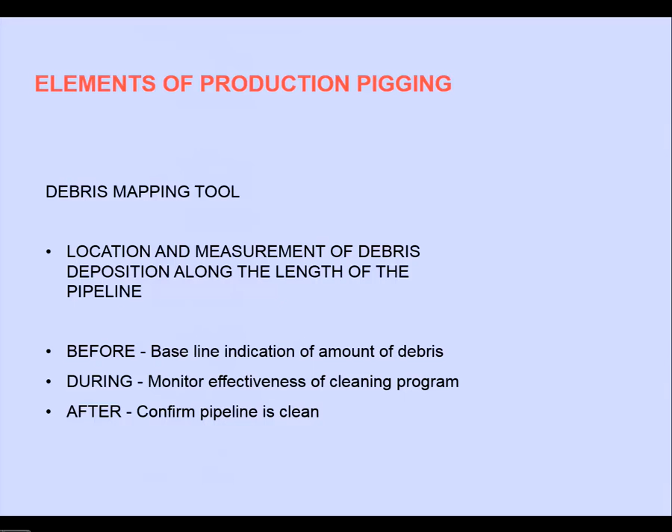So you can run it at any time in between, halfway or a third of the way through the program, just to confirm that what you're doing is actually working and the tools you've selected are right. Once you've completed the cleaning program and there's no more debris coming out, if you run the debris mapping tool again, it will confirm the pipeline is clean—there's no rubbish or pipe wall deposits in there. So that's your qualification tool with regard to confirming that the pipeline is being cleaned effectively.

With the debris mapping tool, you don't want to get to the metal, you want to softly feel the pipeline. So the spring and the sensor arm design and type is very different. The caliper is very hard, a lot of pressure, a lot of force to get to the pipe wall. This one is much softer, touchy-feely—the spring loading is a lot lighter, there's a much higher degree of sensitivity.

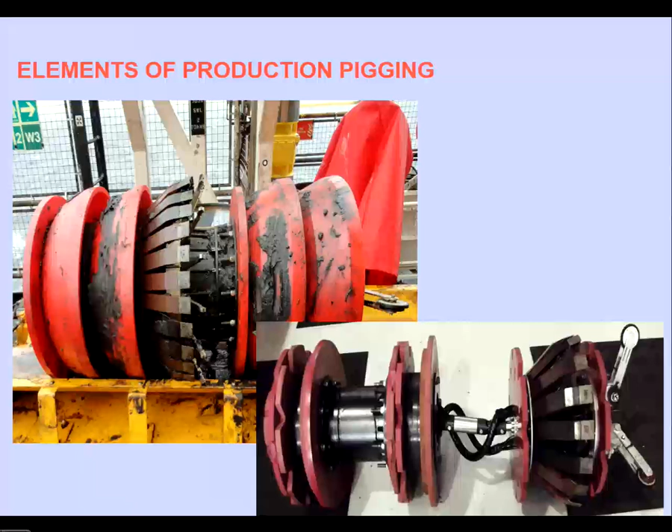So in simple terms—it's not quite that simple because there's different sensor technologies—but the technology exists to differentiate between hard and soft, one or the other, and again it's just different sensor arrangements.

These are specific tools or pigs designed to run in a certain line of a certain size. Some operators or companies provide items that can bolt on the back of one of your pigs that you're running. So it's either a bespoke tool or it's something that can be added to one of your existing pigs as a modification.

So that will measure the thickness of the deposit, where it is along the length of the line. It also measures a lot of other background features as well.

The temperature is recorded, the linear distance, and differential pressure is recorded, so the pressure across the front and the back of the pig. Axial loading is also recorded, so if there's any vibration impact that the pig might hit or sense as it goes along the pipeline. There's also a gyroscope on board, so X, Y, Z.

This is all information that the pigging company will take and compare with what's known about the pipeline to confirm the pipeline condition and the amount of debris that's in there.

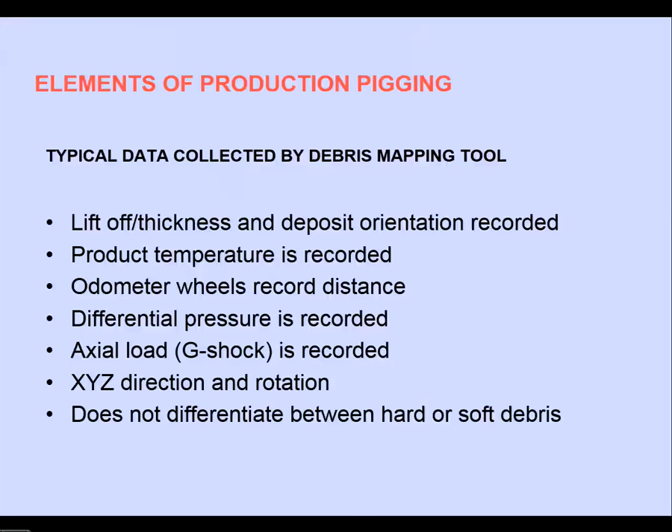So this is quite simplistic data. In reality, the reports are a lot more complex, but this is just a fairly simple snapshot that the company would give the platform once the tool's been received. So this is a quick overview.

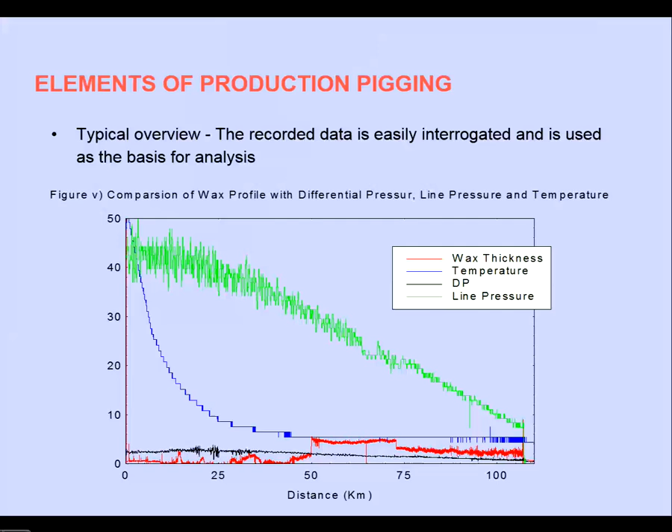So an output of that would be a range of thicknesses along the pipeline length, and it'll tell you the volume of wax in the pipeline. So there's 343 metres cubed of wax in that pipeline. You know from the cleaning point of view how you're going to contain it, how you're going to get it out, how you're going to handle it, and how you control the rate at which you bring it out.

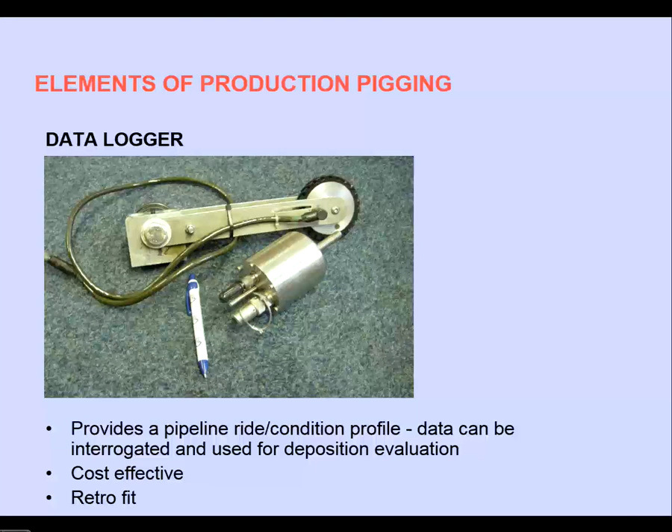A data logger would normally be run by operators maybe every month or every quarter, just to get a profile, a general trend. These are fairly inexpensive to buy - you can buy one for a few thousand pounds, bolt it onto the back of a pig, and it will tell you that the production pigging you're doing is achieving a certain level because your pipeline profile is remaining pretty constant.

The debris mapping tool runs can be as expensive as an inspection run - it might cost somewhere like £75,000 to run a debris mapping type tool, so it's not something you want to run all the time. From a production cleaning point of view, if you're running a pig every few weeks and recording and reporting that data, running a data logger every 3 months just gives you a trend, a visual image. You might want to think about running a debris mapping type tool ahead of an inspection later on.

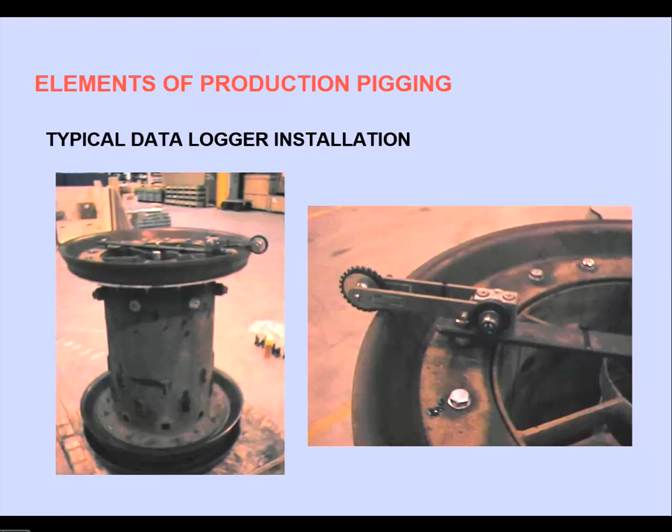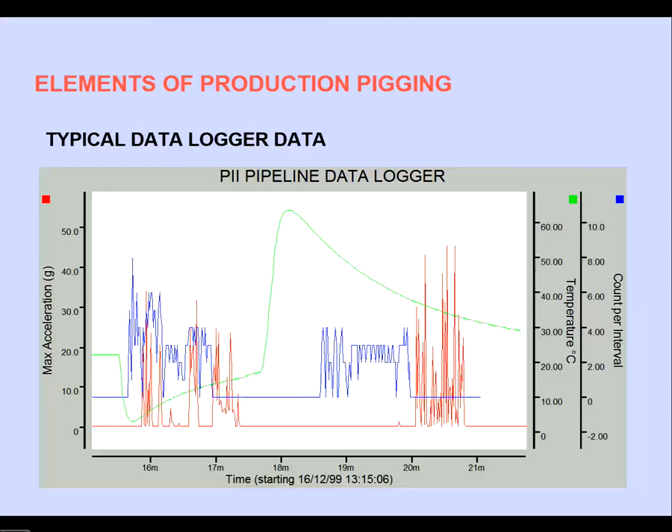Because you know where the debris is, you start off using pigs that are low performance and often undersized, so it brings out a minimal amount of wax. For a small diameter pipeline with such a high volume of wax it could take several runs - maybe 40, 50, 60 pig runs to clean it. It's not something you can do quickly, depending on the volume and your recovery rates, but the pigs can be sized to bring out a certain amount of wax.

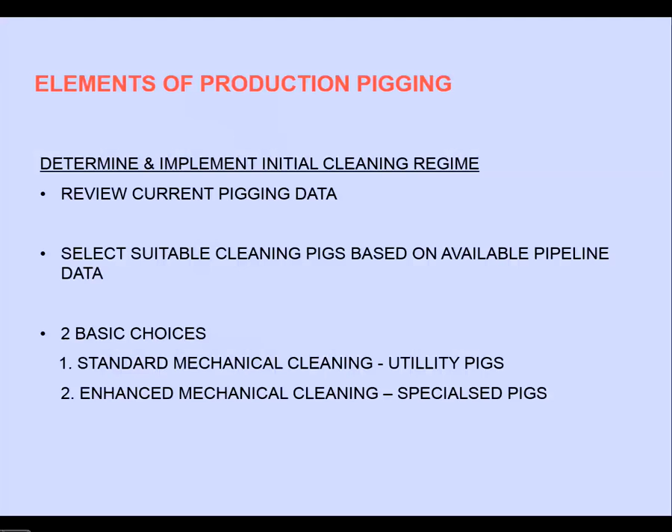When implementing a cleaning program, there's data to look at - all the background history, maybe a geometry tool or a debris mapping tool already run, so we've got a good indication. Then we've got two choices: mechanical cleaning pigs, standard off-the-shelf utility pigs, or more specialised cleaning pigs. Which one you choose depends on what you know or don't know about the pipeline - taking all that information and any new information required to select the best pigs for what you want to do.

If we look at the standard off-the-shelf pigs we talked about earlier, and the enhanced, more specialised cleaning pigs, in a bit more detail - the methodology is determined by the approach taken, and then we'll use standard or specialised pigs, or both, depending on how we set up the cleaning programme.

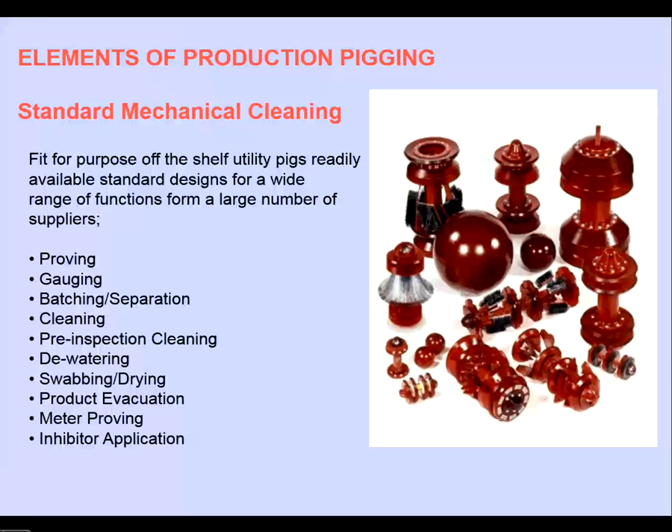The standard pigs we talked about earlier are off the shelf, relatively fit for purpose for proving and cleaning operations, light cleaning, light duties. They're not great performers but they do the job. Typical examples are foam pigs, batching pigs, brush pigs, and gauging type pigs. We'd normally pick standard pigs where we know it's safe to do so - no concern, good data, we know what type of debris we're dealing with, no restrictions, good history. So standard cleaning pigs tend to be used more for regular production cleaning or light pre-inspection cleaning, used early in a specialised cleaning programme because they're low performance - not the best cleaners in the world, but fit for purpose.

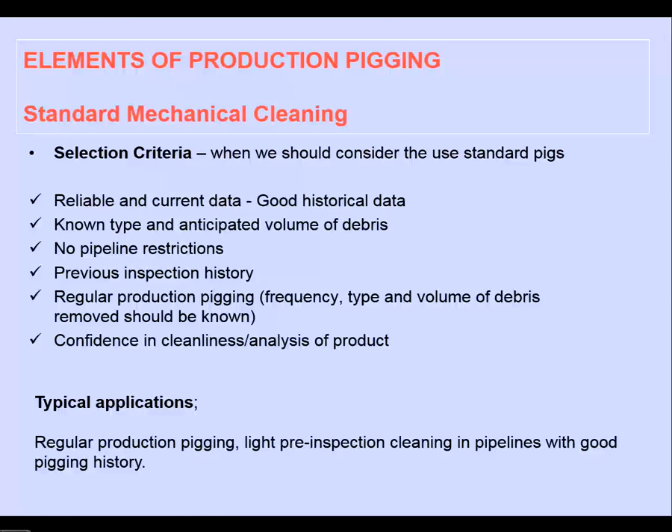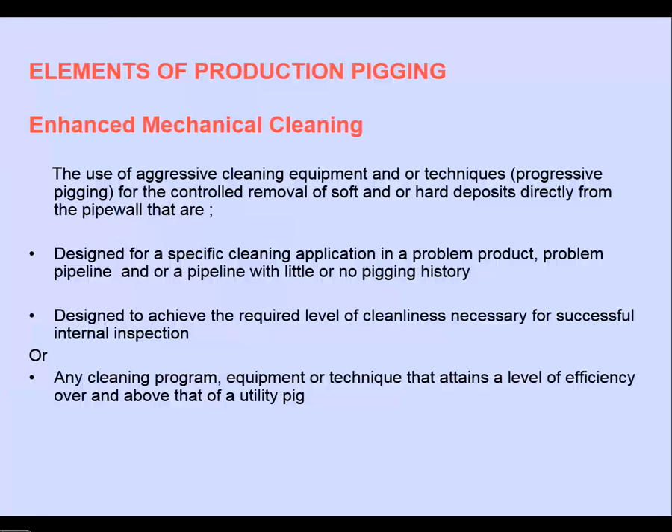The enhanced cleaning pigs are a lot more specialised. These are designed for specific pipelines, often for specific cleaning problems or applications. I'll show you some details.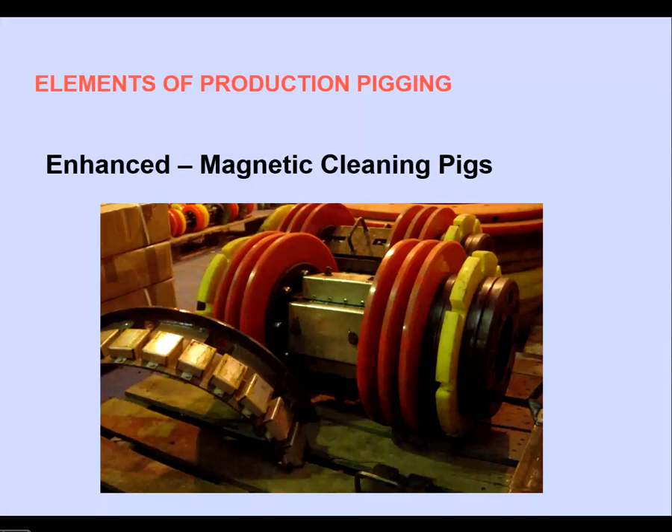The magnetic cleaning pigs can also be more enhanced or specialised. We talked about standard pigs with relatively small magnets - here's a very heavy duty magnetic pig where the magnetic blocks basically form part of the pig body, so the whole body is magnetic. This will pull out a lot more debris compared to a standard pig. For flow rate, the pigging speed for a magnetic cleaning pig should normally be kept as slow as possible - typically a velocity of 0.5 to 1.5 metres per second, up to a maximum of maybe 3, so it moves slowly enough to allow it to pick up the debris.

So this might only pick up maybe small magnets. These magnets might only pick up a few ounces, or a few grams, of metallic debris compared to the heavy duty one, which will pick up several kilos. You can see this pig's gone through the pipeline, it's been received, and it's just covered in welding rods, so that's picked up a lot of steel material. There is a big difference again in the performance.

If this was running, this is a gas line prior to running a PII tool. This was for a gas company MOL, in Hungary, and this pipeline hadn't been inspected since it was built. So for the PII, we insisted that a magnetic cleaner was run. We brought out all of these welding rods, which had been left in the pipeline for, I think it was 7 years since it was constructed. They'd been sitting in the bottom of the pipeline for a long, long time, hadn't been picked up. If the inspection tool had been run with that sort of debris in the pipeline, it would have been trashed, and that would be like the best part of £1 million tool wrecked, and somebody would have to pay for it, the operator.

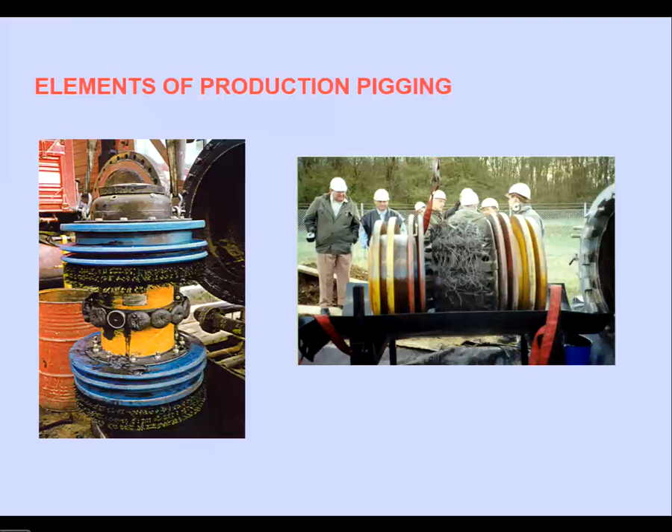Scale and wax - these pigs are a lot more aggressive, and this sort of pig can potentially damage the pipeline. So scale and wax removal is normally managed by a specialist pipeline cleaning company.

This is a pinwheel type pig. There's a number of people that use this type of technology. You've got these steel fingers which are mounted on a polyurethane disc, and these have got a tungsten carbide tip, so it's a very, very hard tip, much harder than the parent pipeline material. As you can see, this has left not actual grooves but polished lines. So if this is not sized correctly, if this disc is too big, if the diameter across these pins is too large in relation to pipe ID, it can cause damage to the pipe wall.

In extreme cases, I've seen this before, using this type of pig in a very, very heavily corroded pipeline, this actually resulted in pipeline failure. This pig was so aggressive that where you had very, very thin pipe wall, down to less than 25% remaining wall thickness, this pig actually went through it. So they are very, very aggressive.

So you've got the pinwheel part for knocking off the scale, and this one's fitted with magnets on the front to pick up any ferrous debris. This particular design is dual module - this is the lead pig, that's the rear pig, towed at the back like a trailer. What happens is all of the debris gets taken off the pipe wall, but it's left in the pipeline, it doesn't bring it out. You've then got to put another pig through to push the debris that's removed out, so it's a two-stage operation.

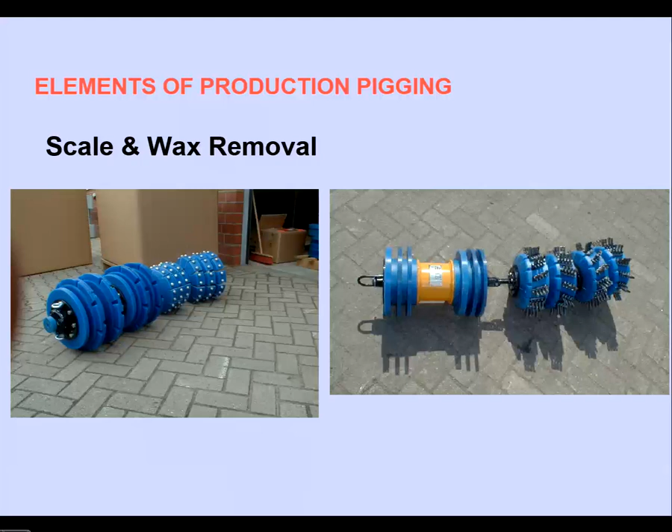This is another type of descaling pig. Again, this is pretty crude, but you've basically got steel, usually heat treated - a hard steel series of arms just with a very simple blade. It's designed to break off hard scale and hard wax. But again, if this isn't sized correctly, this will cause some real damage to your pipeline. So you've got to be careful when using these sort of technologies, and that's usually why they're only carried out by specialist companies.

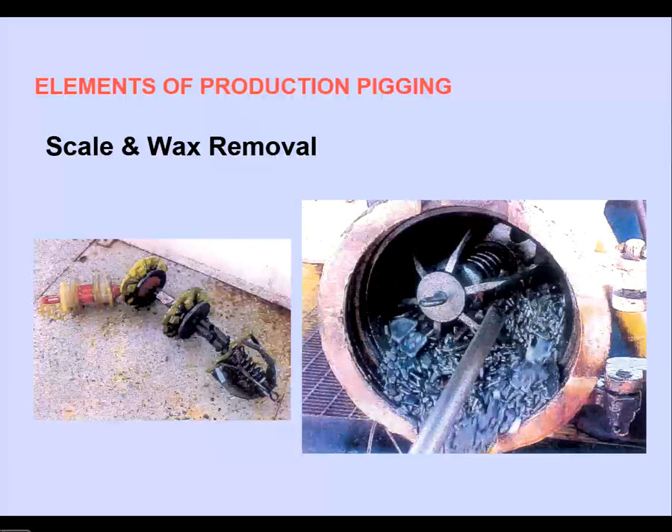This tool is like state of the art. That's kind of like your Land Rover, I suppose. By comparison, this is the Rolls Royce. This tool is designed - when it goes in there, it's got all of these wheels and grinding and cutting tools on it. So this tool actually almost machines the pipeline bore as it goes along.

This is a company called Reinhardt - no sorry, they're actually Danish, not German. But the technology is superb. This tool will bring out the debris - it uses bypass, it uses cutting, it uses grinding. It's a very expensive tool. They won't sell you these pigs - these type of cleaning tools are all only available for hire.

A cleaning job using Reinhardt might cost £300,000 or £400,000, compared to a cleaning job with somebody else using something that's not as good but takes longer, which might only cost £150,000. There's a big difference in the cost, but there's a big difference in the results.

But again, if this isn't sized correctly and run correctly, that'll take your pipe wall off, reducing the wall thickness. Very aggressive.

So those types of tools are really only used mainly when we've got problem products, bad pipeline designs, and known issues with hard waxes and hard scales.

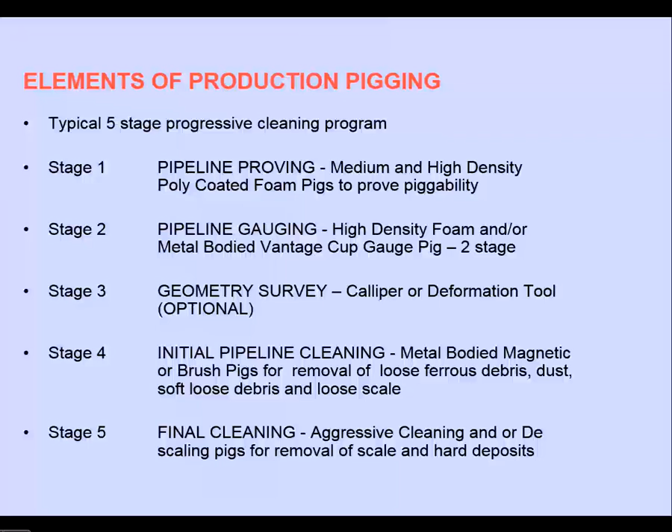Okay, not far off. Do you want to take a break just now, or do you want me just to keep on going? Push on. Okay.

So we've kind of pretty much covered it anyway. When we come to implement that cleaning program, we want to do something that's progressive, controlled, gives us good results, and gives us results we can be confident in. So these are the 5 main stages.

Depending on what you know or don't know about the pipeline, you may or may not need to use all 5 stages. So you don't have to start with stage 1. If you know the pipeline's pigged on a regular basis and we've just got an issue with loose debris, we can go straight to stage 4.

We might not need stage 5. If the pipeline's never been pigged for a number of years, or since it was constructed, we start at the beginning. So we go back to basics, prove it using foam pigs, gauge it to confirm the minimum bore before we can introduce metal-bodied pigs.

We might want to consider the geometry type survey or the deformation type tool, so again, some optional elements. We could also include the debris mapping at this stage. An initial pipeline cleaning uses the lower performance utility type cleaning pigs to just have the first pass at cleaning.

And then where we know we've got problems with hard wax and scale, the last stage of cleaning uses the more aggressive pinwheel descaling type pigs to really rip out all of that debris. Again, the debris mapping tool would be used in the latter stages if we're going to use that for pipeline measurement.

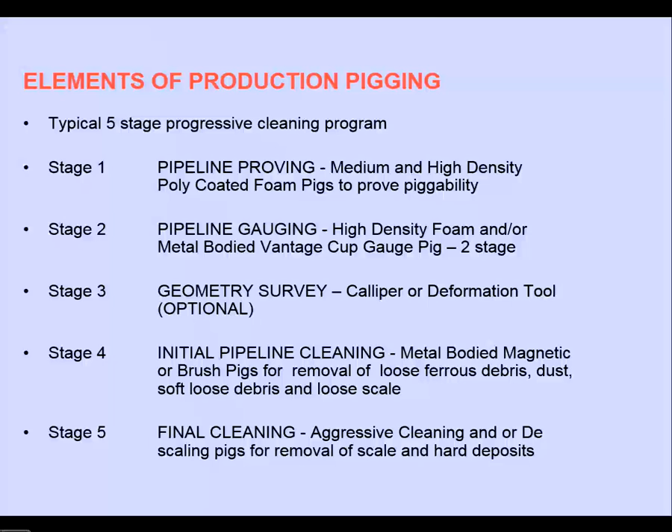And because it's very buoyant, even in a gas flow but more so in a liquid, it doesn't need to touch or seal, it'll still come out. So it depends. More commonly medium density, yes, but there are occasions when you might want to start at low. Again, it's based on what you don't know about the pipeline, really — it's down to the information that you have.

A typical progressive cleaning program could look something like that, where we've got a couple of foam pigs initially to prove the pigability. Then we confirm the minimum bore using a gauge pig, a foam gauging pig. We know we can put a pig of a certain type through there, so we'll put the conical cup, because again that's very flexible. We might run the caliper tool, which is an option.

Then we'll start the cleaning, so we'll get the magnetic debris out, light cleaning using cup brush pigs, still light cleaning, then progress to the bi-di brush pig, increasing the aggressiveness that little bit more. Then we might start using the descaling de-waxing pigs.

And we mentioned the coverage, so those pins and those fittings that are around those pigs, quite often they can reduce the number. So the coverage is, you start at a low coverage, 25%, cleaning between time, increase the coverage to 50%, and build up the aggressiveness.

If you ran the pig at 25% and you brought out a significant volume - if from a calculations point of view you're expecting to bring out 100 or 250 kilos, and you brought out more, then you wouldn't go onto the next pig, you'd stay at that level, at 25%, until you were happy it was bringing out what you'd calculated it to bring out. Then you work your way through the program. So depending on the results of each pig run, you determine whether or not you move on to the next type of pig or stick at the same level.

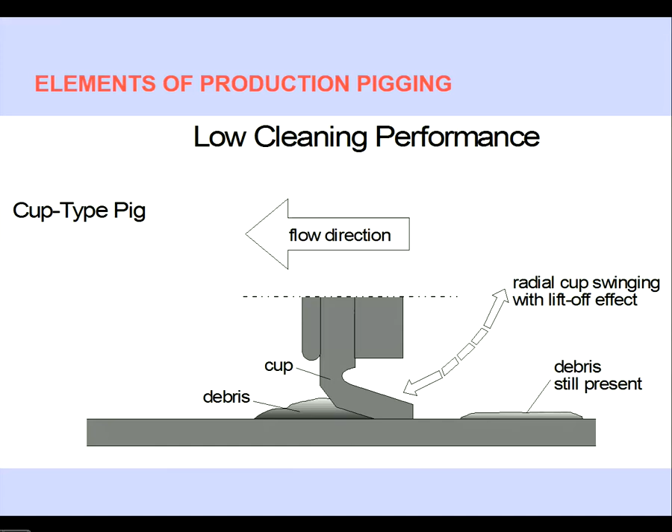We don't want to risk bringing too much debris in. The disc is very good, so obviously the disc pigs are used at the back end of the program where we've got confidence and we're cleaning crap out and we want to bulldoze it and push it out. We want a big high cleaning performance.

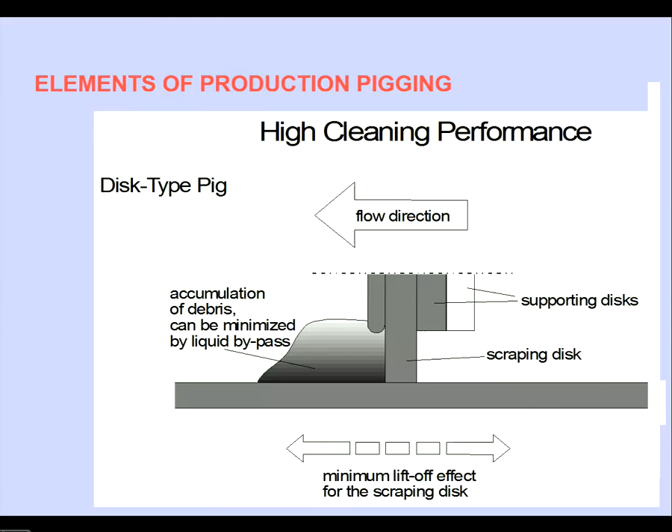Also with the brushes, we saw there were spring mounted brushes, whether it's a straight arm or a leaf type spring. They'll ride over debris, they'll bounce if the pigs are going too fast, but they don't tend to clean into corrosion pits. So if you've got corrosion already in the pipeline, the spring mounted brush won't actually clean into it particularly well, if at all, compared to the fixed brushes where the brush is either circular or on a block and it's fixed. There's no spring, so the bristle's doing all the work.

So the bristle will clean the pipe wall and it will also clean into the pits. There's a big difference in the cleaning performance between a spring mounted and a circular brush or a block type brush. So again, discs and cups and the types of brushes are a big consideration, especially in the general cleaning program.

So confirming the cleanliness, we've gone to the extent of cleaning the pipeline, we've done this cleaning program, we need to be confident that it's clean. We talked about best practice, so we see the debris removal trend, it'll increase, it'll level off, and it'll decrease. Best practice, great, we can be confident we've cleaned the pipeline. However, there's no science applied to that apart from we've used the most aggressive pigs that we've got and now there's nothing coming out, therefore it must be clean.

We can apply some of the technology that we talked about, so the debris mapping tool and the data loggers, when they're used as part of that cleaning program or in production, it just gives us a good picture and physical quantification that a pipeline has been cleaned.

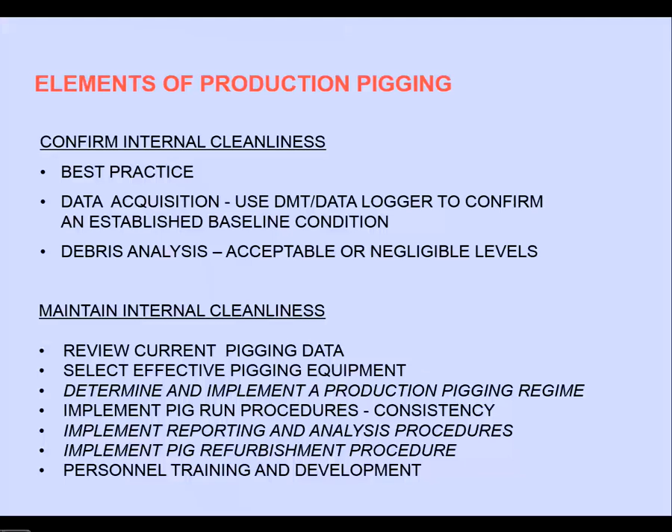So run pigs on a regular basis, do a run report. The operator should be reporting when he runs that pig, when did he run it, how fast was it going, how long did it take, how much debris did he bring out, and he records that. Two weeks time when he runs another one, he looks at the operating parameters, brought out 25 kilos of wax, great. Two weeks later, it's brought out 25 kilos of wax. So you can see the trend.

If all of a sudden it's bringing out nothing, or if all of a sudden that volume increases significantly, then there's something wrong, there's something happening, the pig's not performing, there's a change in the operating parameters, there might be different co-mingled products coming in, so there's a whole range of things that you can go away and look at and determine what the issue might be. It just allows him to identify problems or issues before they occur.

It's also good practice, and there should be procedures in place, because you might receive a pig and say there's one bucket of wax, I might receive a pig and say there's two buckets of wax. Well, how big's the bucket to start off? You know, it should be a weight, so you should take the wax and measure it, so you've got a standard measurement process, because quite often you see these reports and somebody will say two shovelfuls or three barrels, or two buckets or 25 kilos, and a lot of it's just speculative, it's not even guesswork, you've got no idea what the actual volume is.

So it's important that they maintain it by using the right pig, having a frequency. If anything changes, if they monitor that run and record the data and record the results, they can change the frequency as things change. But at the end of the day, they keep a constant level of cleanliness on that pipeline, because they've spent probably, to clean it and inspect it, they've probably spent £250,000, £300,000, which it might not sound like a lot of money, but it's a lot of money in time as well. That's just the physical cost of the actual work scopes.

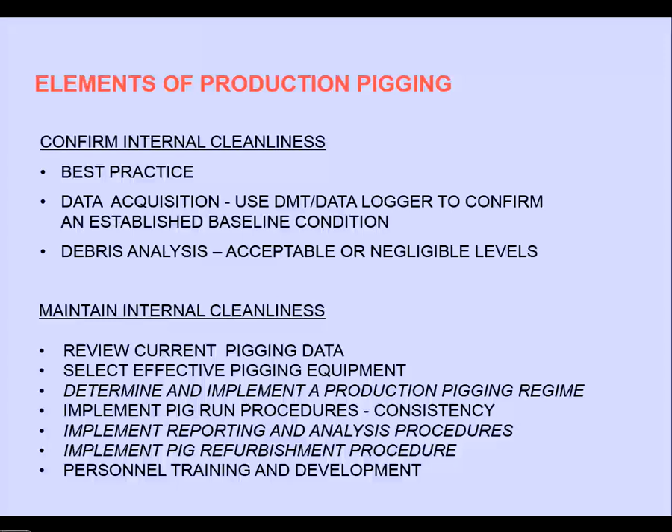We'll kind of jump the gun a little bit there, so we monitor it, we do the periodic data acquisition. We can use the data loggers again, we can use the debris mapping type tool, we look at the reports, we do report analysis, we do debris analysis, keep the pigs in tip-top condition, and then we change the program to suit the trend.

So it's all about trending and looking at it and seeing what it does, seeing how it's behaving and tweaking it up or down to maintain a constant level of cleanliness.

So yeah, really the review of the procedures and the reporting system is paramount for production pigging, and also any production anomalies, trends and potential problems can be identified early and investigated.

So to summarise then, with regard to implementing the production pigging programme: review the previous pigging history, so that's looking at everything, find out as much as we can possibly know to give us the best amount of information to start. If we don't know it, we've got to find it, we've got to go and do geometry runs, do geometry surveys. Establish the level of cleanliness, so how clean is it before we start?

That's what we use to gauge the methodology, the approach that we're going to take. Implement, decide what we're going to use and implement the cleaning program to clean the pipeline, confirm it's clean, then continue to maintain the cleanliness and monitor it on a regular basis.

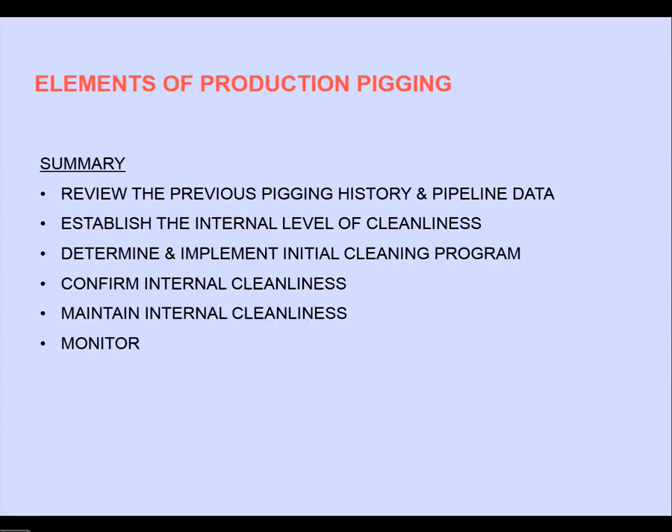If there is a heavy dent on a pipeline and a unidirectional pig got stuck there, how are you going to run it back? How are you going to take it out? If it's a unidirectional pig, you can't. If it won't pass the dent, then you've got a problem. So there's other issues, it depends.

Hopefully we don't talk about pig tracking here, but if you know where that dent is and its location, you can try increasing the pressure, decreasing the pressure. One thing to do would be, if you decrease the pipeline pressure upstream and downstream, allow the pig to maybe try and resettle or reinitiate to re-establish a seal, then try and pig it in again. It depends whether or not you've got bypass across the pig as well. If it's got stuck and you've over-pressurised it, the cups will blow over as well, so it might be that you've got bypass across the pig, in which case that's another problem. So you can look at increasing the flow rates, increasing pressure, cyclic loading, so high pressure spikes, low pressure spikes, and this is done over a period of days.

When a pig gets stuck, what operators will do is they'll take a big step back and have a look at the potential causes. They won't just go, 'oh my god, let's increase the pipeline pressure, let's increase the flow rate.' That's the worst thing you can do.

So it's 4 o'clock, just turned. No problem.